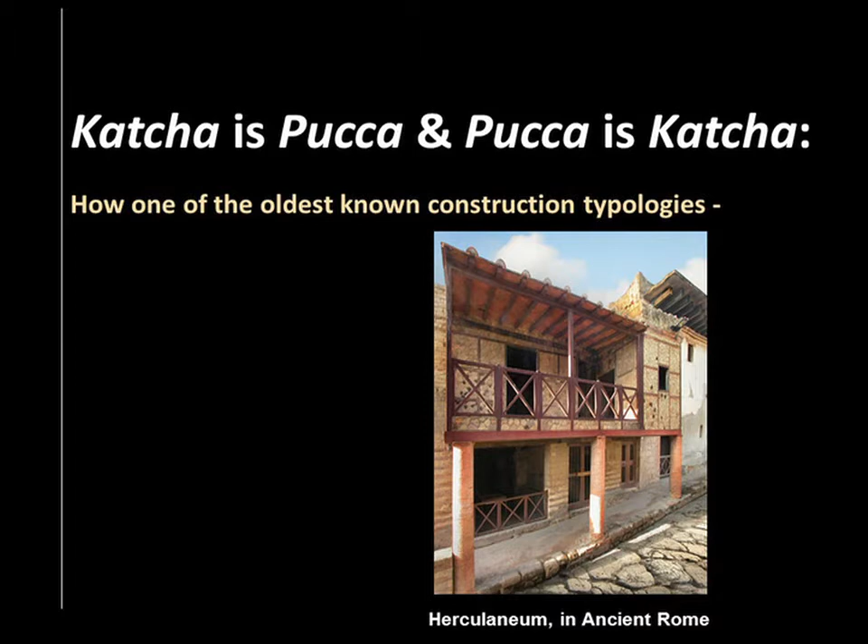There's lots to read about Randolph's bio, but I'll just say that his educational background is both in architecture and building conservation, with degrees from Harvard College and Harvard Graduate School of Design in the United States, and the Institute of Advanced Architectural Studies in York, England.

He's co-author of the book Amoskeag, published in 1978 by Random House and still in print, and also of Satanic Mills, published by Save Britain's Heritage. It was his early work on the great multi-story brick and stone factories, which were subjected to substantial vibrations from the power looms traditionally located on the upper floors of mill buildings in the United States, that launched his later life's work on earthquake-resistant forms of masonry and timber construction worldwide.

We've been seeing these pictures of collapsed buildings in Van, Turkey - pancake collapse. The modern buildings we've been dealing with - ironically, the reason I called the lecture Katcha is Pucca and Pucca is Katcha. For those of you not familiar with India, a Pukka house is a strong, permanent house, and it's become a synonym for a concrete house. A Kacha house is like one built out of bamboo, or now also timber, and masonry is not considered as strong as a Pukka house.

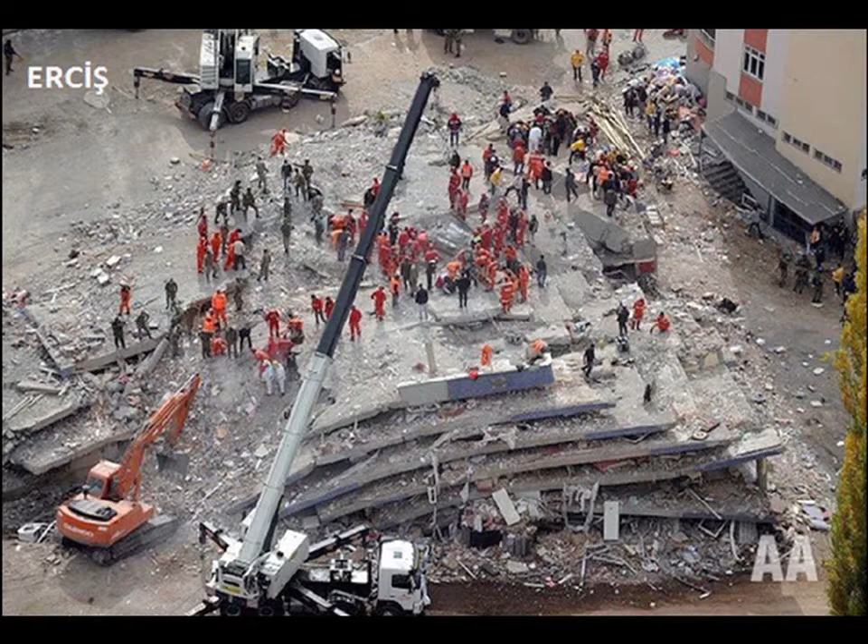And here we are seeing the Pukka buildings, so-called Pukka buildings, collapsing - not only just collapsing, but a pancake collapse, which seems to be invented by reinforced concrete slab and frame construction. Because then anybody who has survived is under layers and layers of armored concrete, and it takes, as we know, a challenge at best to get everybody out while they're still alive.

That earthquake in Van just recalls the one just 12 years ago - two of them in Turkey, further to the west - where just scads of reinforced concrete framed buildings had collapsed. And then just a few weeks earlier in Sikkim, same images.

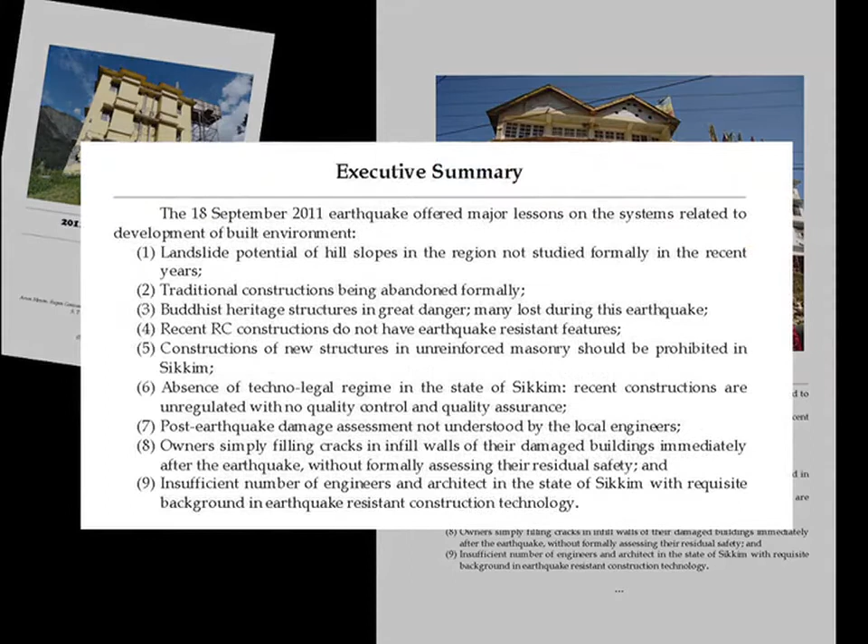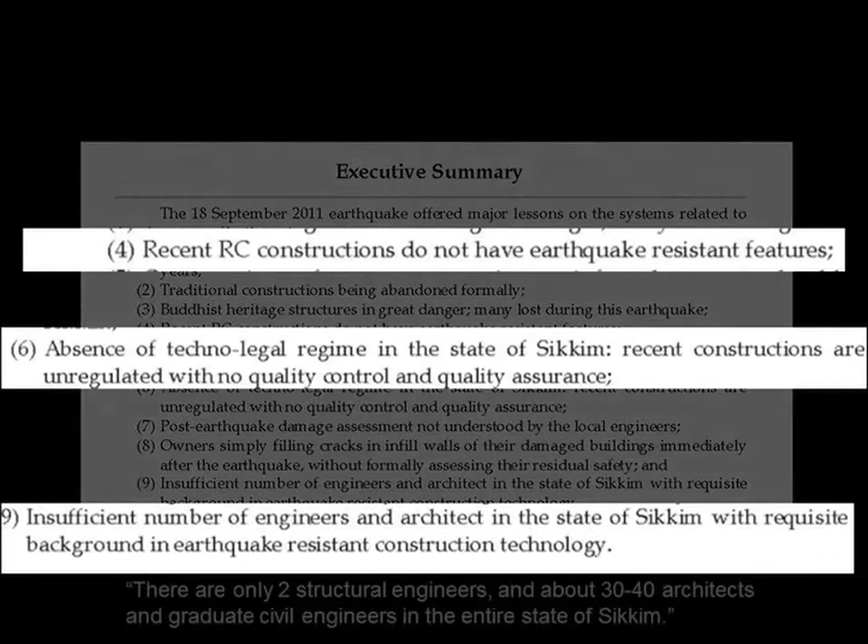It's interesting to look at a report that came out of the Sikkim earthquake and take a closer look at one of the things that were observed. Here you see the executive summary: the recent reinforced concrete constructions do not have earthquake-resistant features. That in some ways just understates the obvious - it's worse than that, as you'll see a little bit later.

But then when you see why, you have to ask yourself, well, if there are only two structural engineers in this part of the world, how can you even expect them to understand it? Well, then you say, well, aren't these and other types of buildings the same? I mean, that people would have at least a basic knowledge and put these buildings up.

What I've come to realize in doing this work is that reinforced concrete construction is a very sophisticated, knowledge-based form of construction, and the absence of the extra training needed to really understand this material has led to a crisis when it comes to earthquakes.

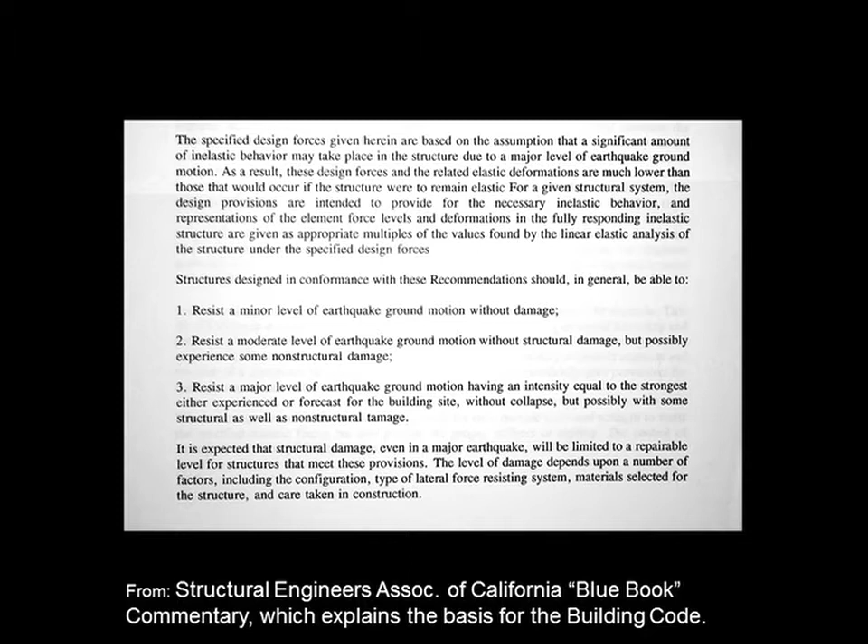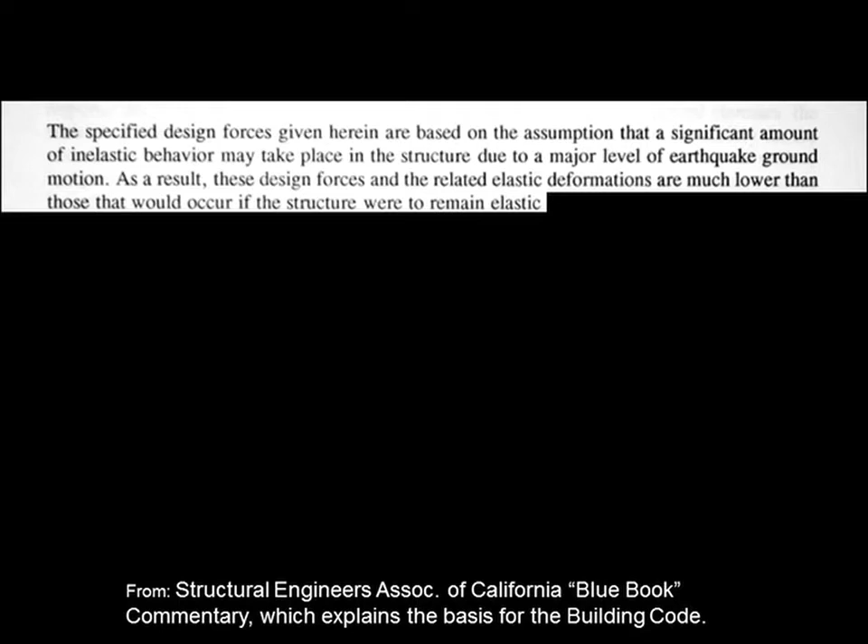Earthquakes are, in fact, unique. Most people will probably not realize that the building code in this country, in Europe, and anywhere there's a building code for construction, is predicated for earthquake risk on using lower force levels than are actually expected to occur in the design level earthquake. The reason is that it would be totally uneconomic to expect buildings to remain within the elastic range.

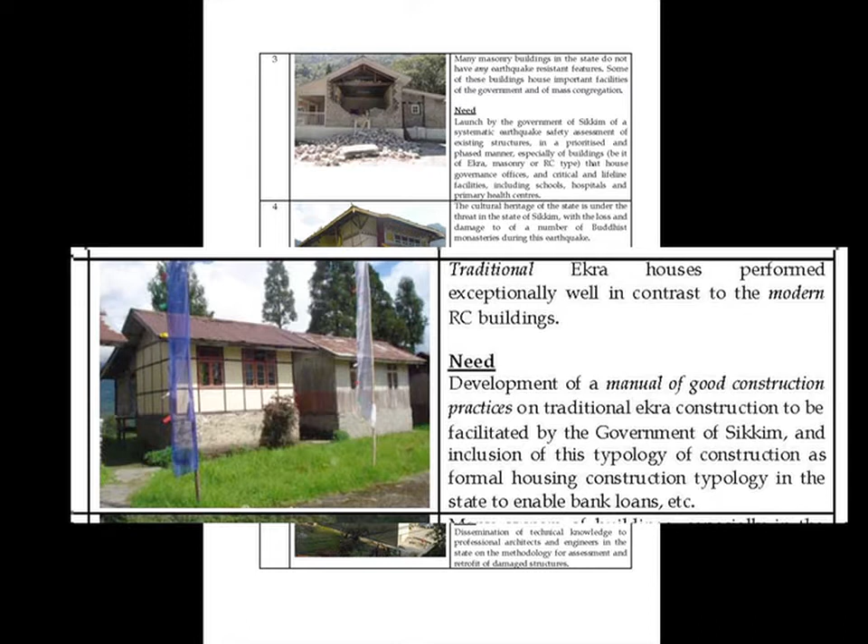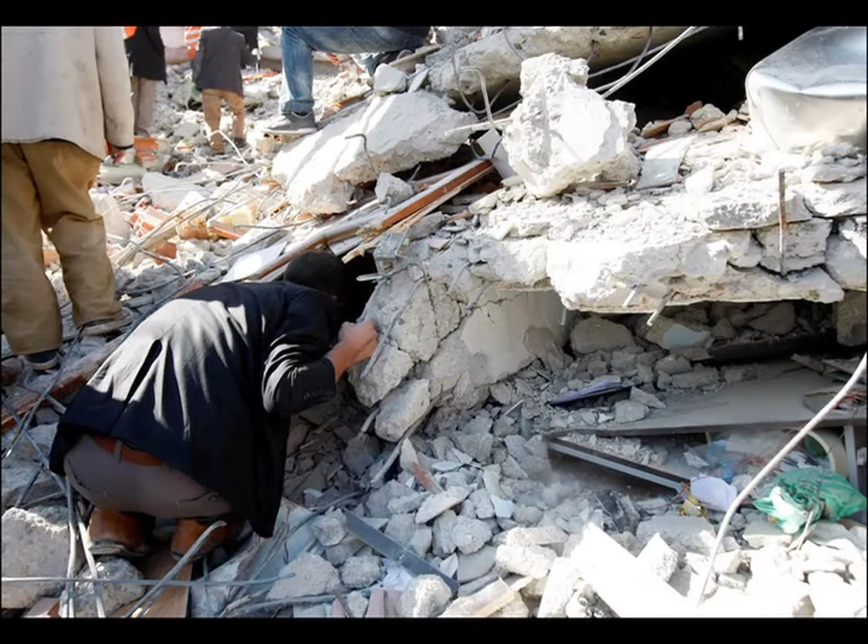Well, did people have training to build those houses? No, it's inherited, it's handed down, it's the same kind of thing. So look at the schools - we know that schools are a building type that has suffered in earthquakes out of scale with almost anything else. It's become the focus of the bank's attention, as well as almost every other agency and NGO involved in post-earthquake work. The schools in the older traditional form did better than the reinforced concrete, the Pukka houses.

This is the situation. What I'm saying, after having looked at this for the last 25 years or so, is I realized the essence of the exercise of looking at older buildings is: what can they teach us?

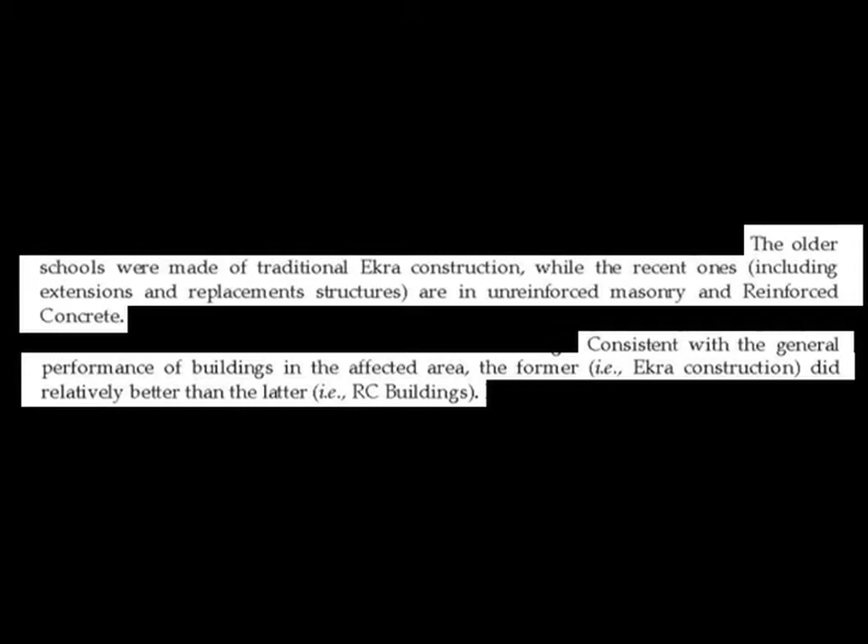And these buildings, in fact, are modern. That's why I called one of my websites Traditional is Modern, because it's time we see the continuum in building construction to really understand the nature of what we're dealing with.

This is Srinagar in Kashmir, the Indian part of Kashmir. These seemingly rickety, tumble-down buildings, as somebody in the 1880s reported in a travel document after the earthquake of 1888, said they seemed like the wind would blow them over, but they went through the earthquake better than the palace, which was just built in unreinforced masonry. And that building kind of says it all. How could something like that have any strength?

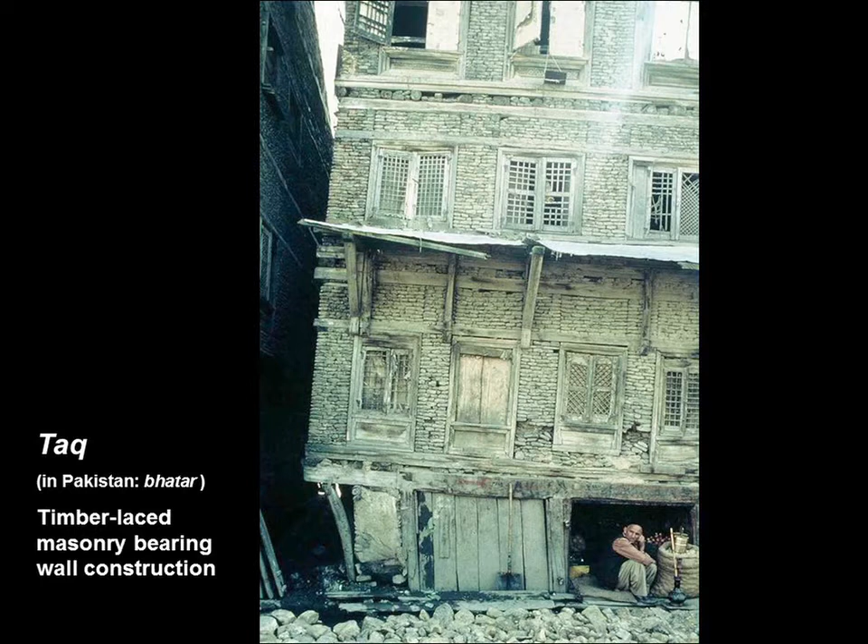Well, when you look at what the construction is and realize this was on a very soft soil site, this is not earthquake-resistant construction per se. It's not deliberately earthquake-resistant. It's a way of holding the buildings together from differential settlement on a soft soil site.

Not unlike Mexico City, Srinagar is on a prehistoric lake bed. And you can see, if you can hold a building up in three-point support on three points like that, that's masonry, bearing wall masonry. You're really talking about something held together by those strengths.

And when you look at how it is constructed, you can begin to see what's interesting about this is there's no vertical timbers. This is horizontal lacing only. I've come to realize that's really actually very important for this type of construction.

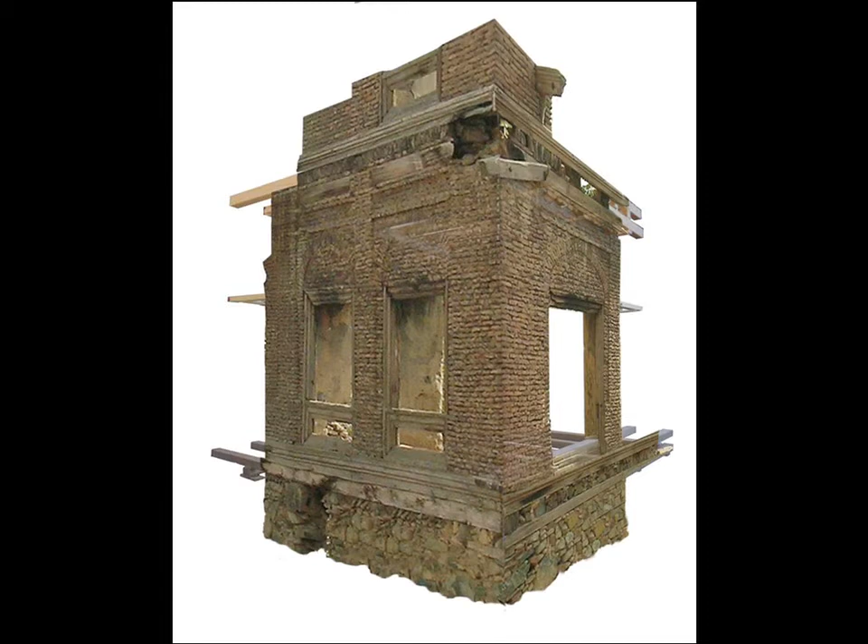Yet in the building code provision they developed for this in India, they stuck in a requirement for vertical rebar. And it's like, wait a minute. In my book here, I said that's the one mistake. I took the liberty to criticize the foremost engineer in all of India, Anand Arya, who wrote that code.

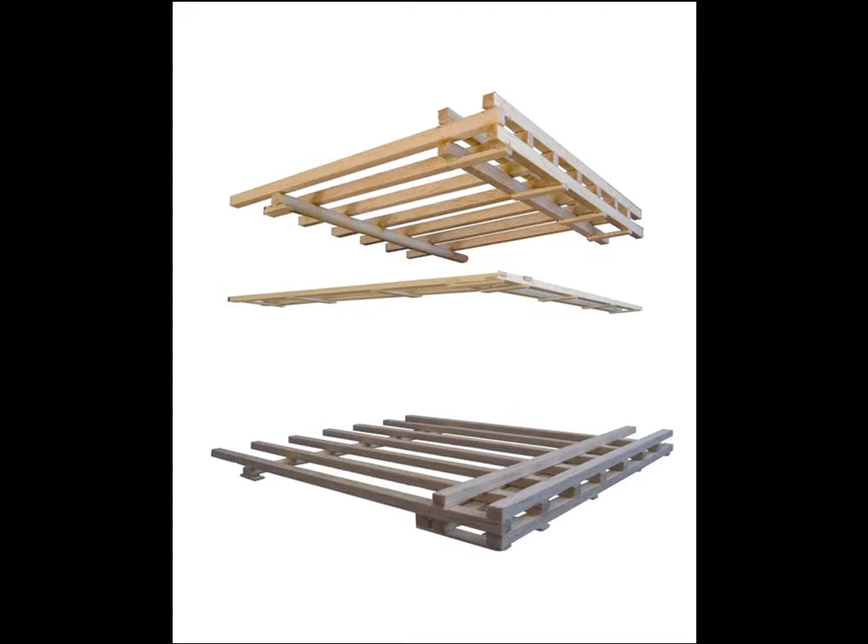Because I think their failure to understand that this is a bearing system, and that it has to move over time and maintain that overburden weight, is a characteristic mistake that engineers today often miss about how masonry works.

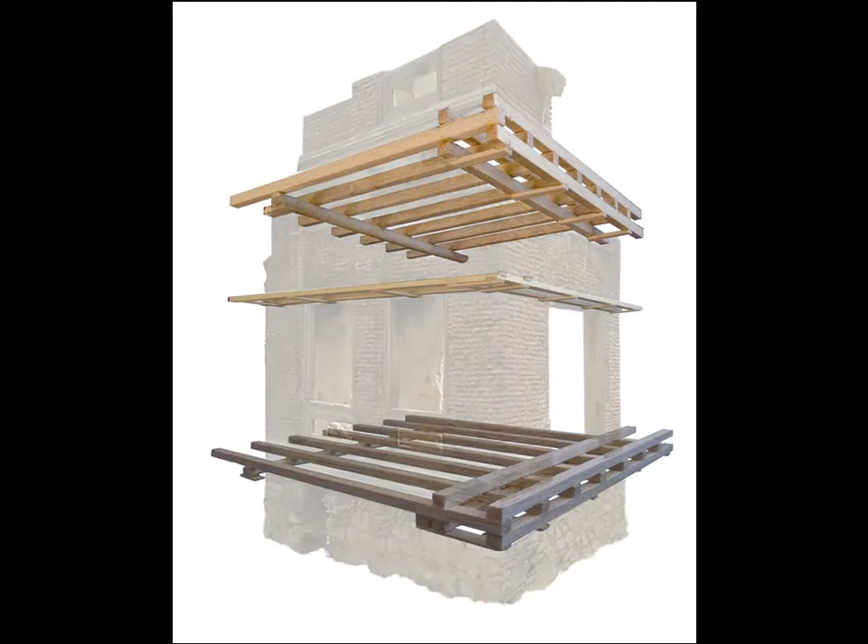So there you see where those frames are. They're at the floor level, gripping on inside and outside the wall, with a joist that runs all the way through the wall to the outside, and then a cross side is picked up by subordinate joists, cross pieces of wood, and then above the window head and at the next floor level.

These buildings are not small. So you can see on the exterior how they're laced together, which is kind of nice to actually see. One of the problems with reinforced concrete and other forms of construction, even retrofitted buildings, is you embed the rebar in the wall and you won't see it. You can't know whether it's there, has it rusted away like it did in Haiti, and so on. Here's what happens to buildings there if they don't have timber lace.

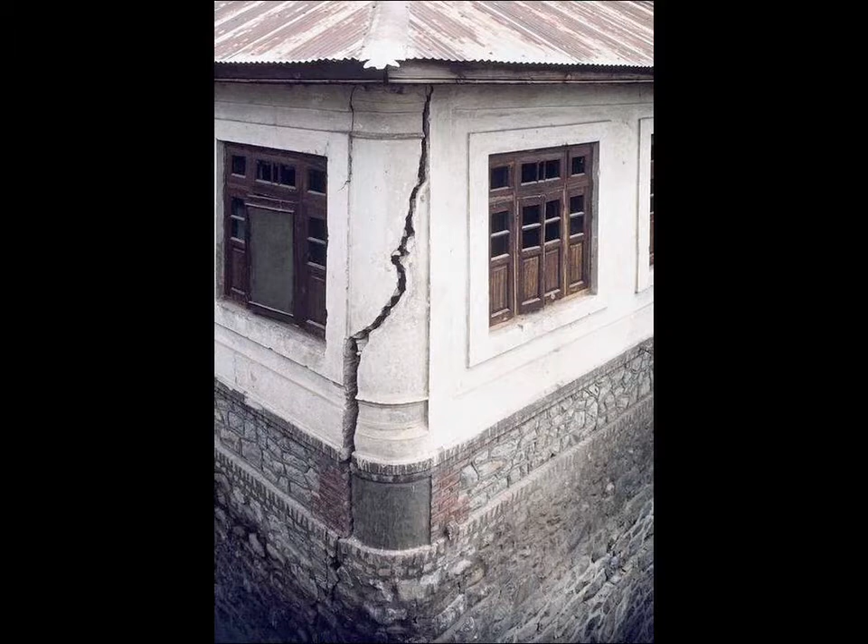Well, this form of construction, the best word I found for it was taq for Srinagar, or bhatar on the Pakistan side of the border, is embodied in the Indian Building Code.

Now the other type, which is going to carry through the rest of my talk, is the dhajji dewari. That is an interesting form of construction because it is almost universal. It's a frame-based, complete timber frame.

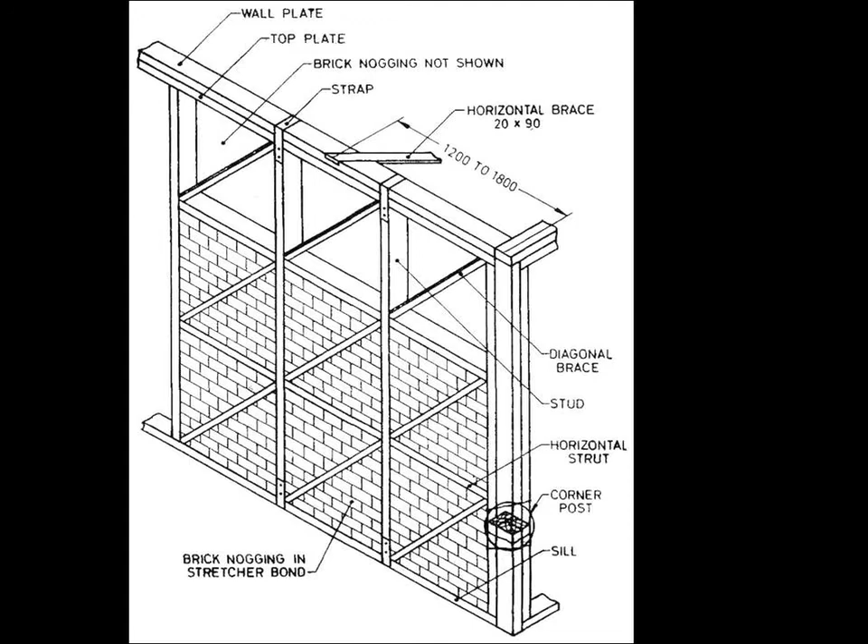What's interesting is that in two places in the world I've been able to find it where it was invented, developed, and mandated as earthquake-resistant construction. First was in Portugal after the great 1755 All Saints' Day earthquake in Lisbon, where it became named the Gaiola and was required by law for the reconstructed area of downtown Lisbon.

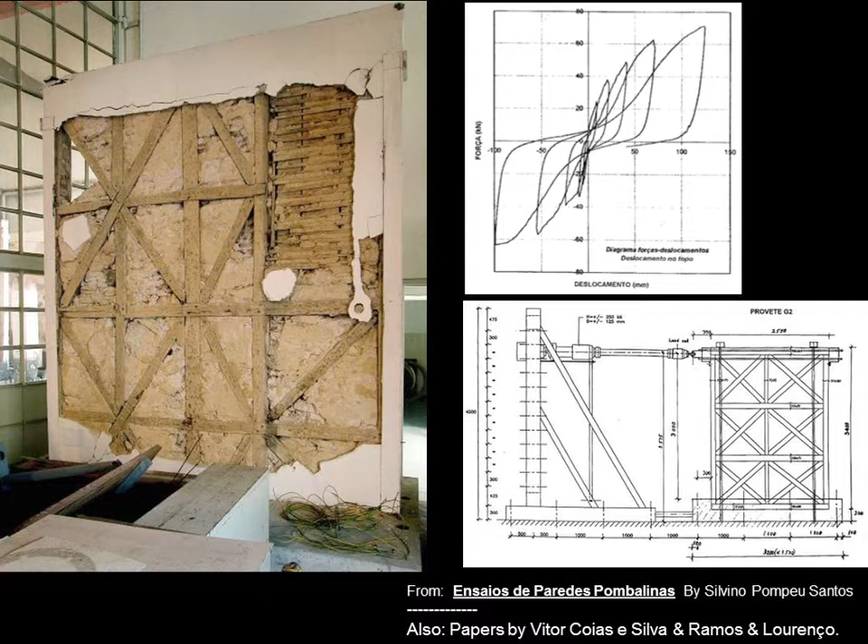And there's a picture of a building where the plaster had been removed from the wall, showing this timber frame with infill. This research that the Portuguese government did shows incredibly good seismic behavior, where the amount of energy dissipation these walls can provide is shown in this graphic. The thrust of the machine never took it to a declining strength.

Moving on to contemporary earthquakes, there is the Kashmir earthquake of 2005, centered on the Pakistan side of the border, but it did cause damage in India. The 80,000 or so deaths were almost all within Pakistan.

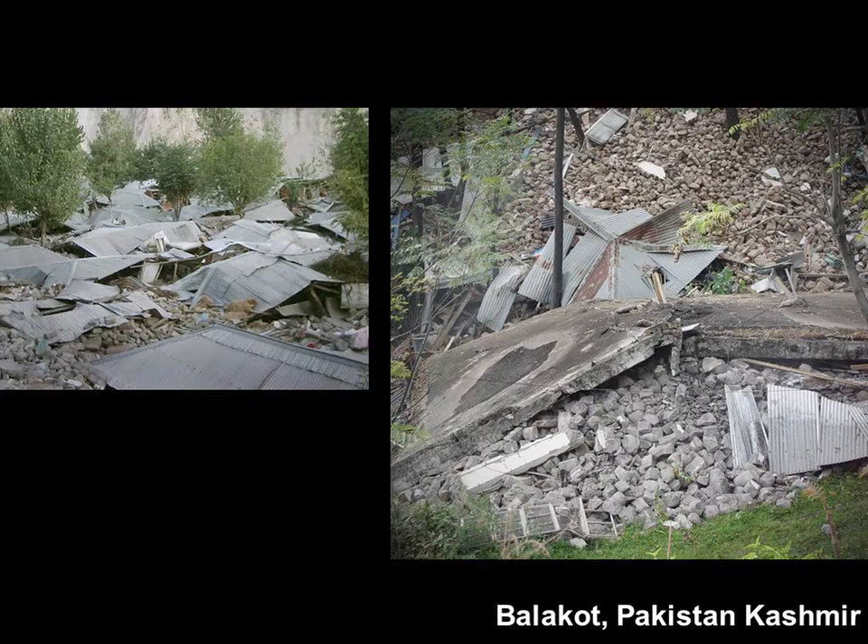In the damaged district itself, the town of Balakot was basically leveled. The only identifiable shapes left were the tin roofs. This was unreinforced masonry block construction where the blocks, if you look carefully, look almost cubic rather than rectangular, making for a very poor kind of masonry. And then the floors were concrete, so they're heavy buildings.

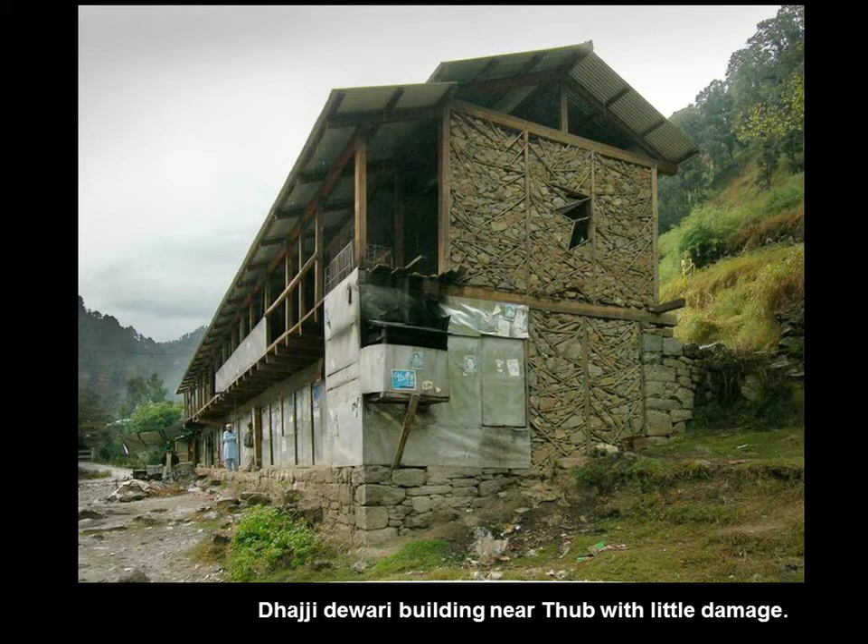I did get into the rural countryside, and that became very interesting - here is essentially their store in the center of a little village called Thub. That collapsed; it was 3 stories to begin with. But right nearby were 2 buildings that were Dhajji construction. Dhajji Dewari means patchwork wall, and they came through just fine.

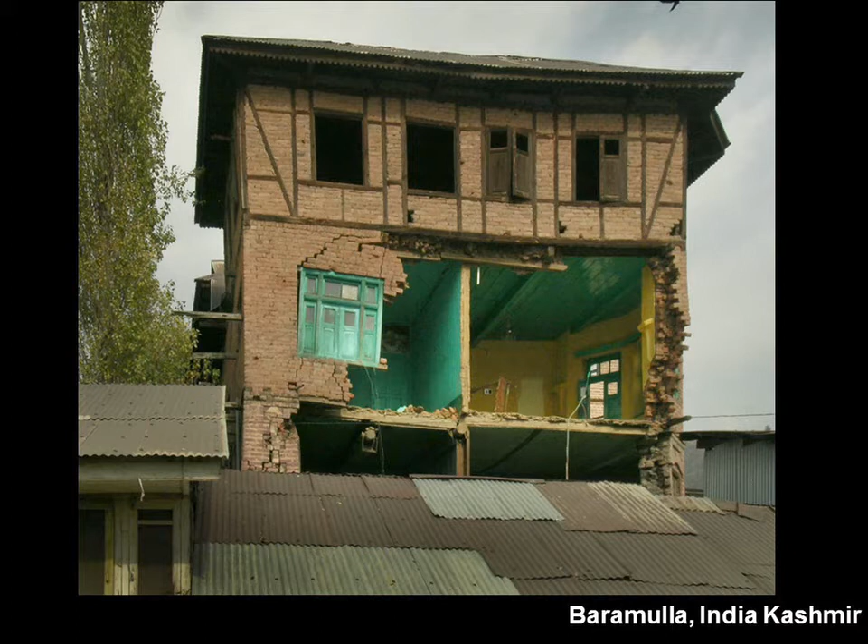And across the border on the India side was this one. It shows you how the Dhajji construction can even form a truss across an opening where the unreinforced masonry below it failed. But looking back into the Pakistan side, in the heart of the earthquake area, the same little town - it was very interesting to see that most of the population who lost houses lived in rubble stone houses.

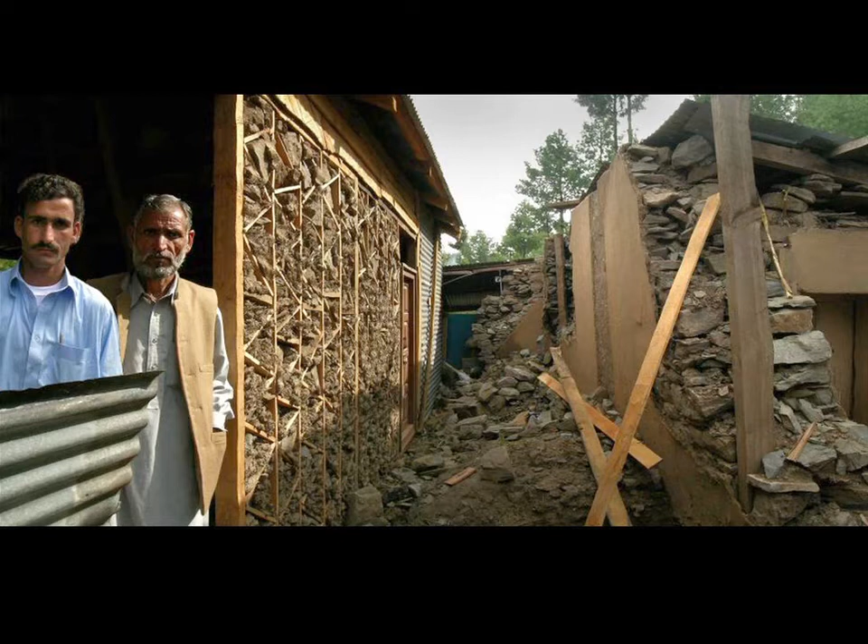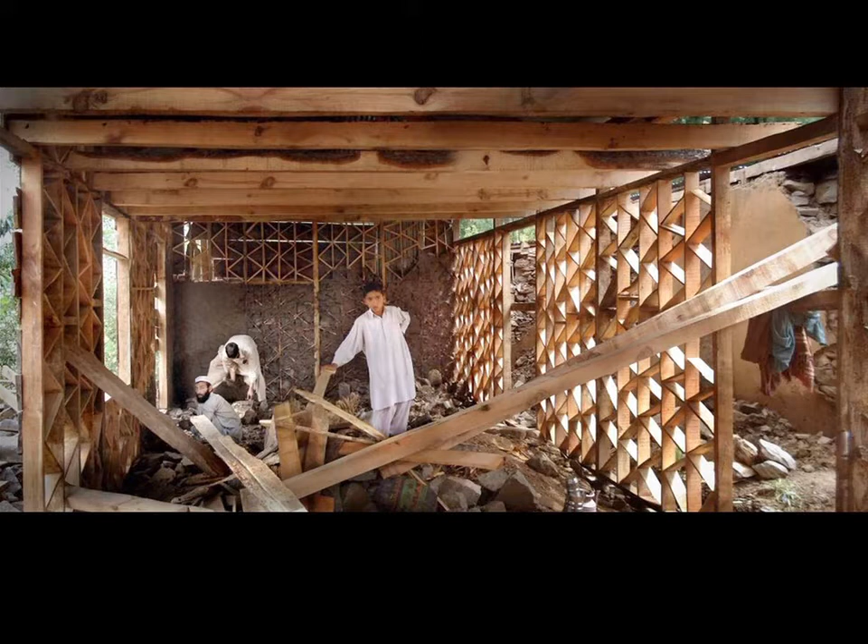The government of Pakistan said you would get no financial assistance for earthquake damage if you didn't build an earthquake-compliant house, which had to be reinforced concrete or concrete block construction. Well, in the rural countryside, that would mean hauling steel and concrete, rebar, concrete block in on mules and horses and maybe some vehicles in order to do that.

These people went ahead and did it themselves. In spite of that, a year after the earthquake, my colleagues persuaded the government to accept Dhajji construction as compliant. I felt particularly moved by that because I discovered they used my language from an article written 20 years earlier in the government document that approved it.

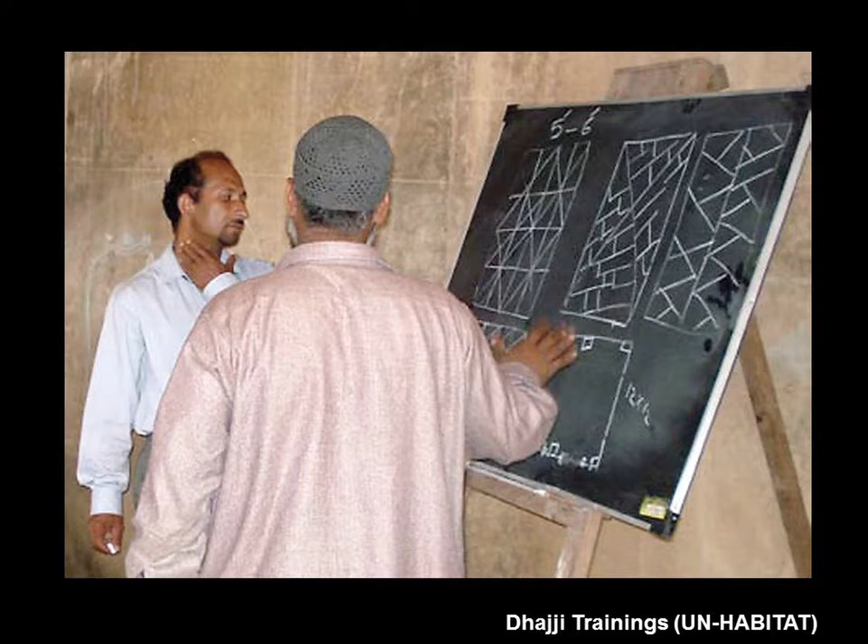And then they were doing lessons on how to do it well in the training areas of the NGOs. The Swiss Agency for Development Cooperation teamed up with UN Habitat, and this is just some pictures of those trainings.

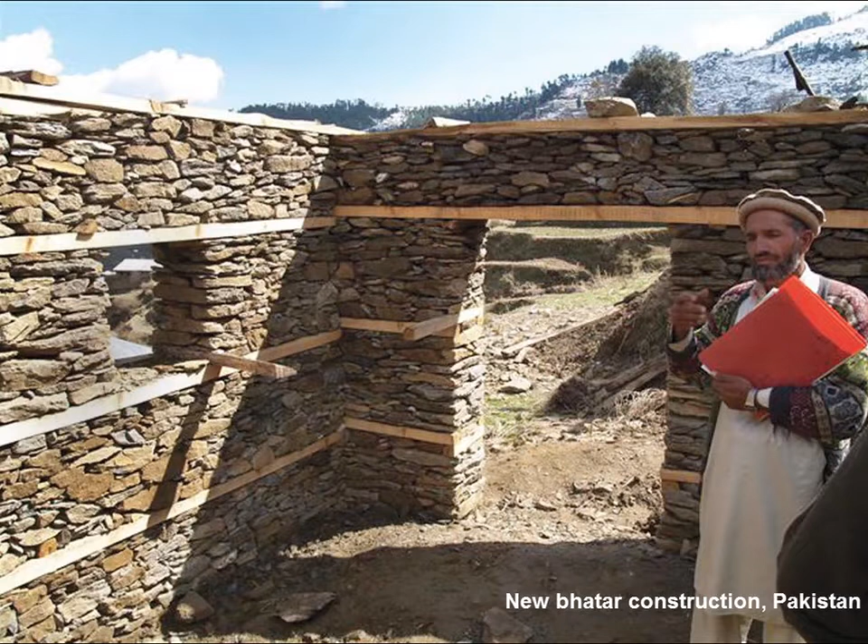And now I'm told by my colleague, who's now in Haiti, that there's over 250,000 new houses having been constructed in Dhajji construction throughout this district in Pakistan. And there are a smaller number, an unknown number of them in Bhatar construction, which was approved about a year later.

The bearing wall masonry construction with only horizontal timber lacing is also approved. So that's a rather good side point there, because in fact, one of the World Bank representatives opposed this, from what I've been told. I even learned that they had a meeting somewhere outside of the country, and they approved this while the guy who was opposing it was out of the country.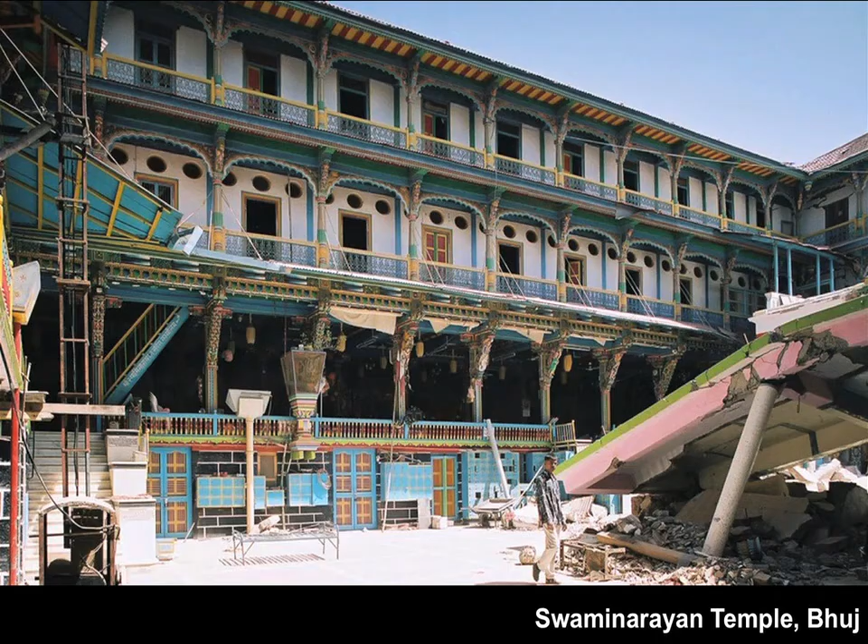There it is, after the earthquake. And the concrete building in the yard there, you see on the right, completely down. If anybody can say that's not a soft story condition, I don't know what is. And there it is, as clean as a whistle. All of those walls above and below are masonry, timber framed masonry - the dhajji style of construction.

So there you see that pattern, and you take it back and it gives it a nice - it's like a shaking table test on it.

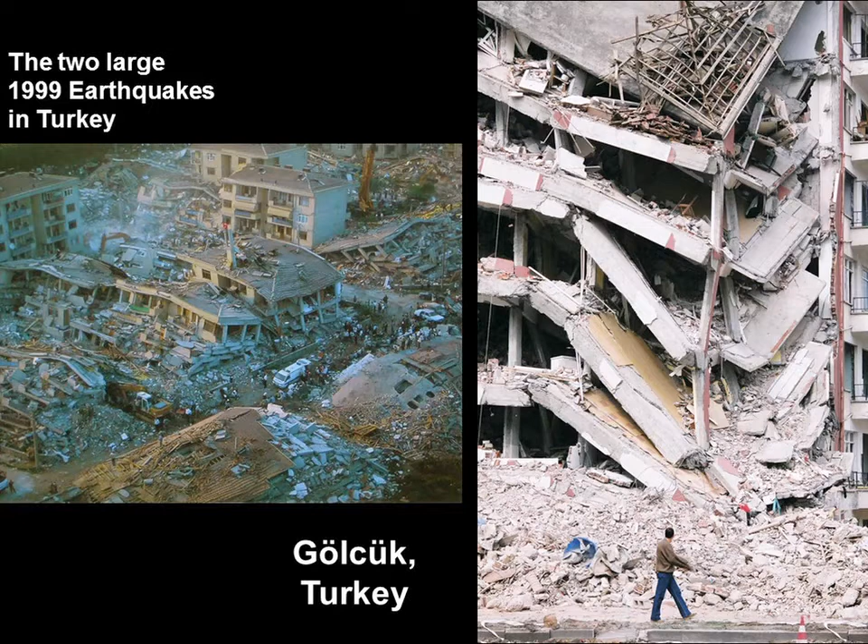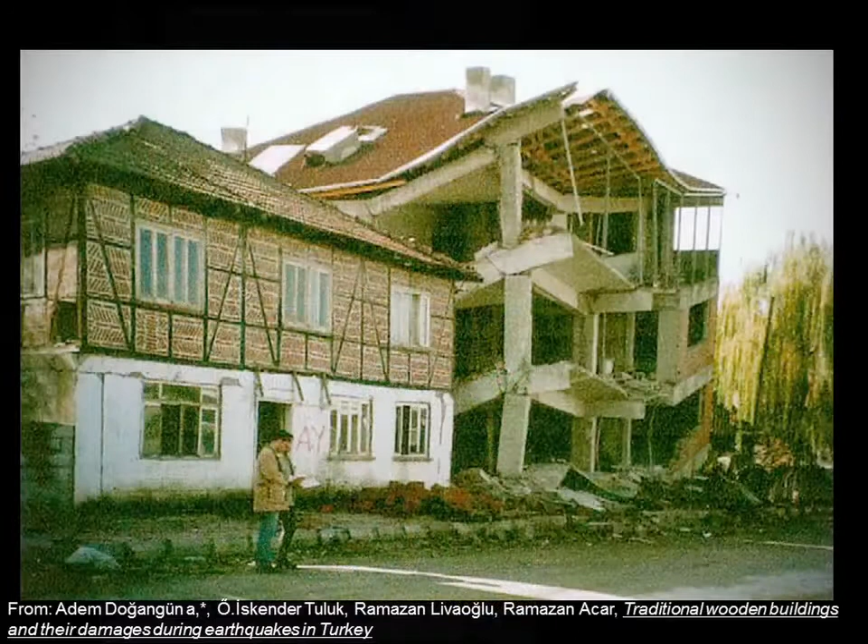Here's an example where the concrete building is not one of these big high rises, so therefore it's not very big, and right next to it is the timber-lace building, and you see how they did. And don't just take the selection of pictures to be an answer. Here is a study that Turkish scholars did where they actually lumped together all traditional structures, including unreinforced masonry, and you see how much better they did across the entire damage district. That was the level of difference.

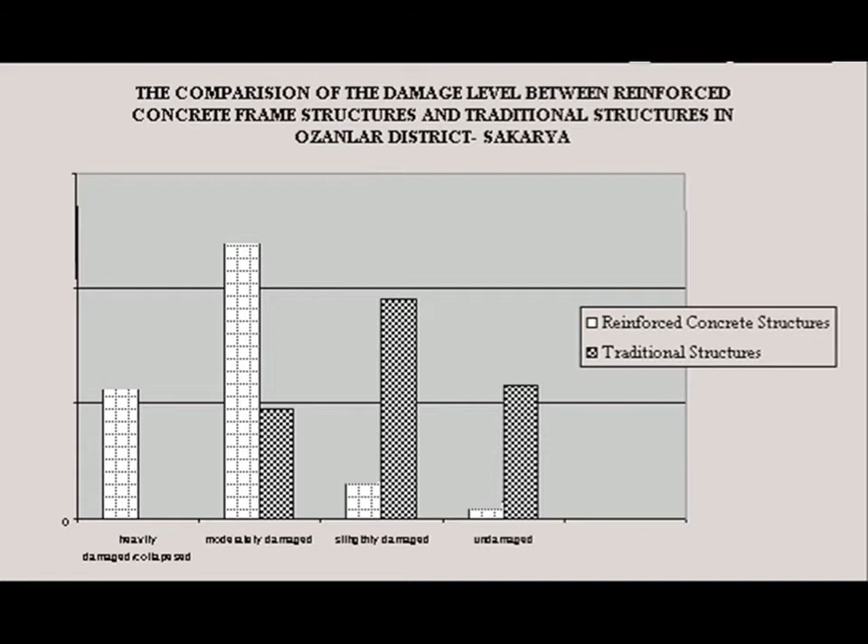So we're dealing with something here where the answer may lie in this form of construction. I have to bring Haiti into it because there is where it moves off the charts, because we have the downtown of Haiti as an example where the reports of the death toll and the amount of damage is extraordinary.

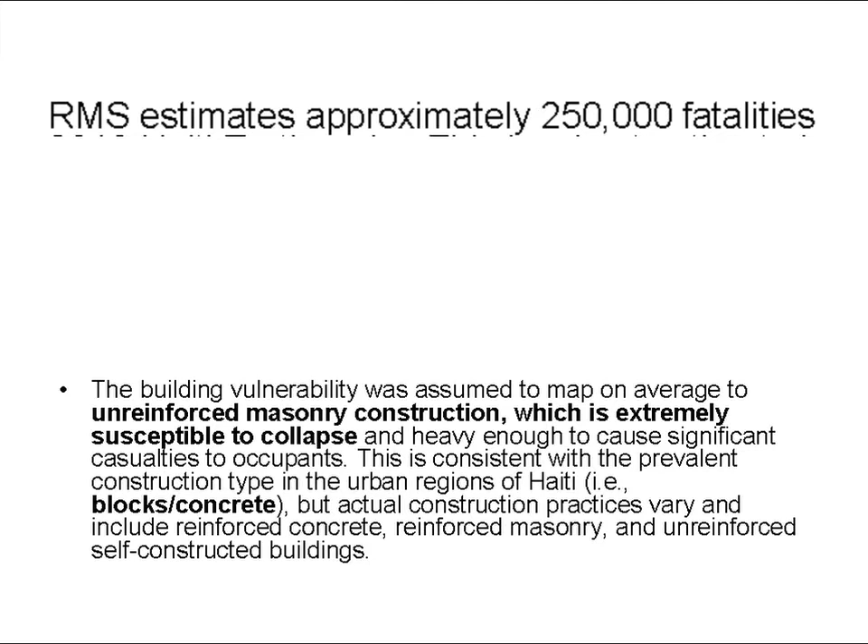Looking at a publication published 4 days after the earthquake by a forensics engineering firm, RMS, Risk Management Solutions, they estimated 250,000 fatalities in this earthquake. I called them and said, what was this based on? And you could see in the report what they did base it on. And as you know, the death toll has stayed hovering around there in almost all subsequent publications.

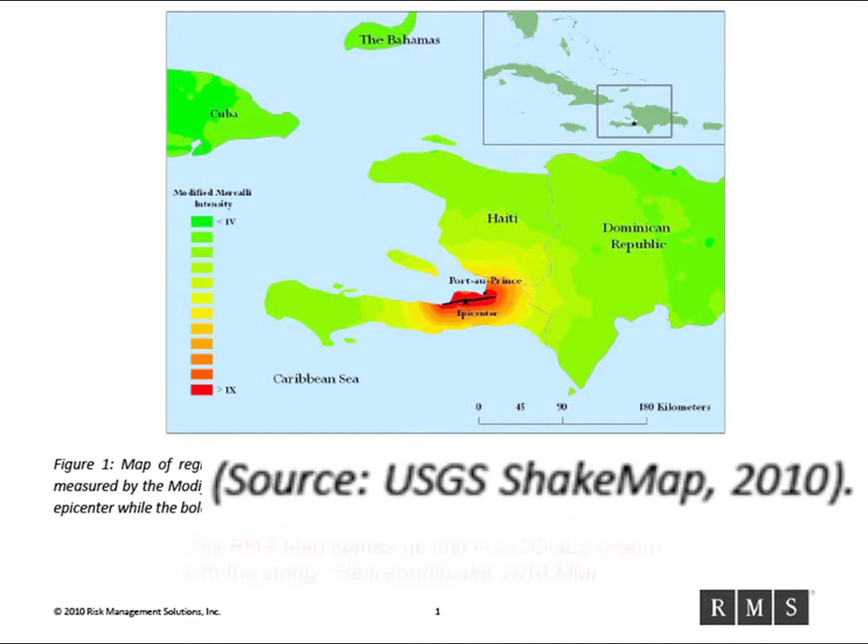But in their report, it was based upon USGS ShakeMap. They don't say which USGS shake map, as if all shake maps are the same. So I went looking for a shake map, and I found one on Wikipedia that shows a fault trace that goes right under Port-au-Prince. This is Port-au-Prince here, central Port-au-Prince.

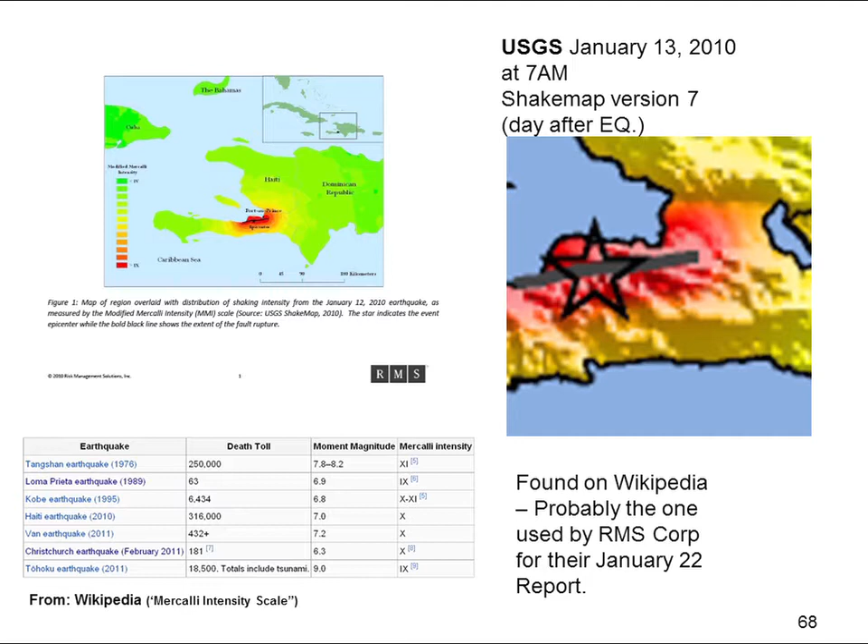You see this is supposedly the line of the break. This is shake map version 7. USGS would not give me a copy; I called them, and they only will give you a copy of their latest version. Well, look at the January 12th version, the day earlier - the fault trace is more out to sea. That's why they thought there would be a tsunami effect, and there wasn't, and it doesn't get to Port-au-Prince. And the current one, since March 4th, also doesn't get to Port-au-Prince. So this is a paler color, meaning under their USGS shake maps, the shaking was less in Port-au-Prince.

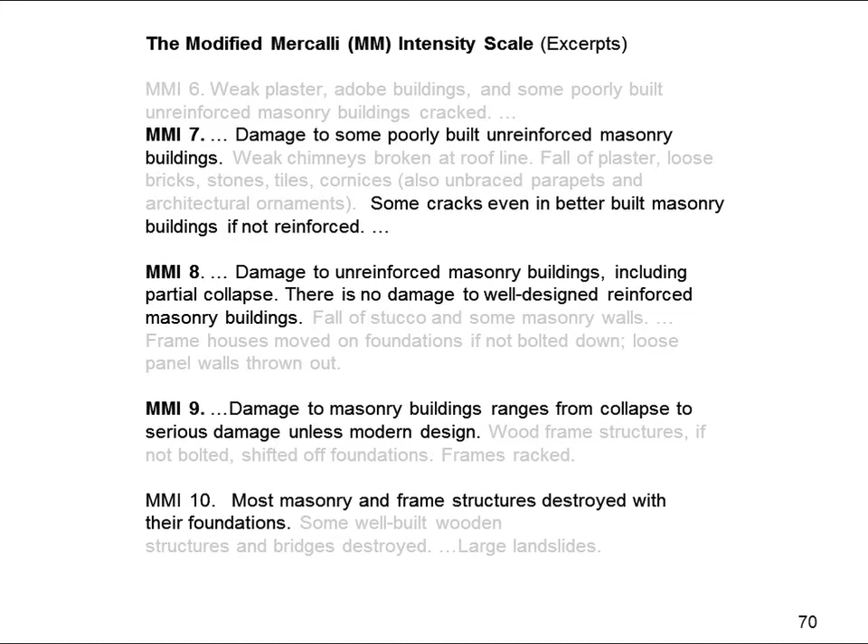Now, the modified Mercalli scale is a qualitative scale based upon building damage to try to estimate how much ground shaking there was based upon buildings. Based on what you'll see in a moment, I've come up with the estimate that this is actually an MMI 7, whereas if you go on the internet, you'll see it as high as a 10, which you see right there - it's still published today. And the USGS has it as a 7.

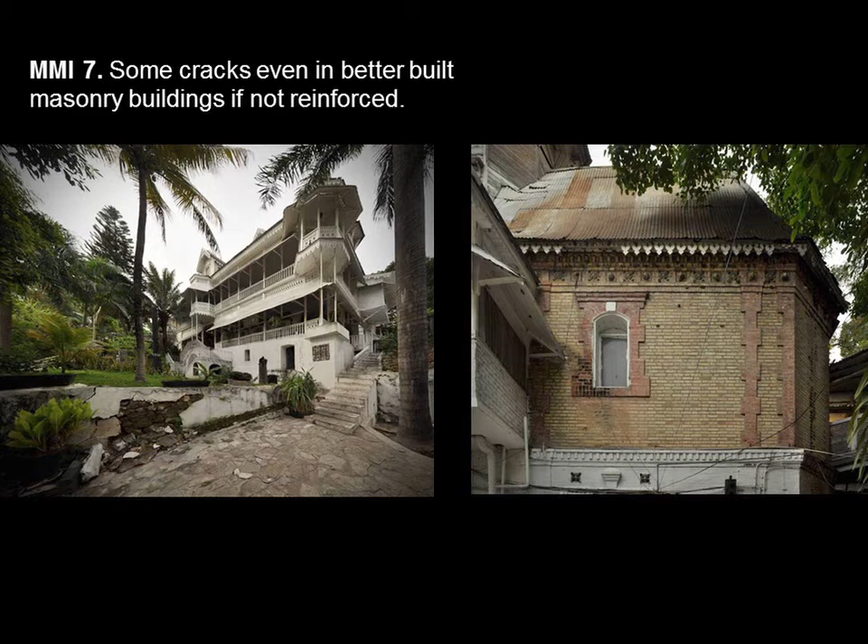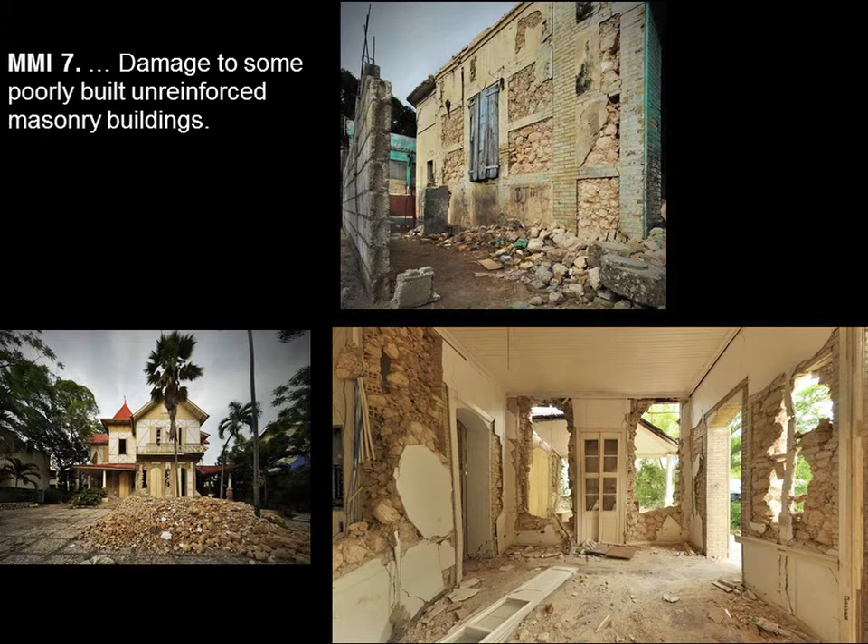Another form of construction, the more usual form of historic construction, is this, which is an infill rubble stone masonry. So it'd be hard to classify rubble stone masonry, even though it's surrounded here by brick, as good quality masonry construction when it comes to earthquakes, for many reasons I can explain. And as you see, the rubble stone fell out, but the building remained standing. So this would classify as a poor masonry building under the Mercalli scale. Again, these buildings were extant when Giuseppe Mercalli was alive.

And then I want to honor our guest, Anushka Mecklenburg, who is the owner of this house, which is on the cover of the World Monuments Fund book. This house is a combination - it's actually well crafted, good quality brick masonry, but behind that masonry is rubble stone, so it falls in between. That's the level of damage that it had. It did not collapse, and we're now trying to help her and help Haiti save this building, which has become an icon of the earthquake by being on the book.

There is another type, which is like the dhajji dewari of Kashmir, or the himis construction of Turkey - here in Haiti, in French, called colombage, infill masonry. This building had just tiny bits of damage on it, and it is right behind the National Palace. That pancake collapsed. And nearly across the street from here, a rather small concrete building also collapsed.

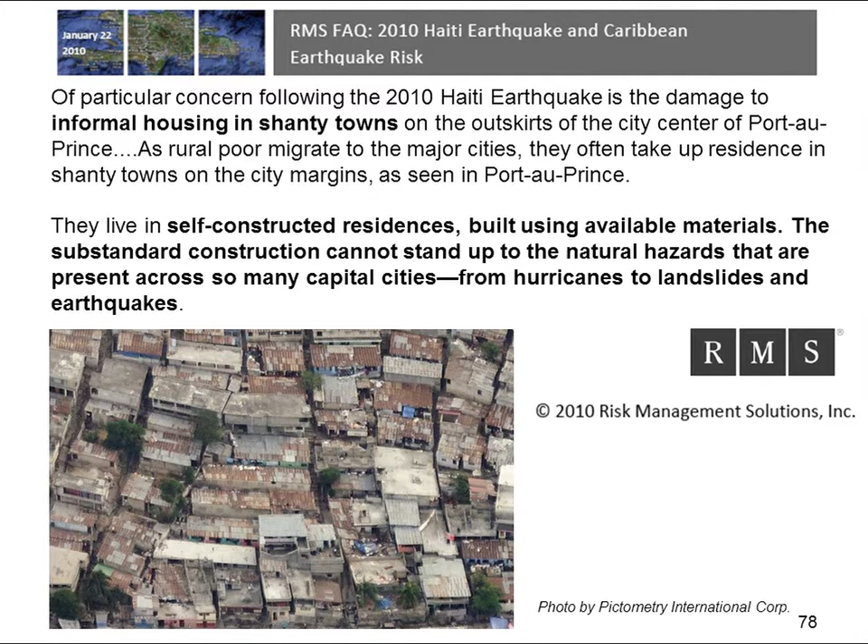But what about what I found in the pictometry analysis? Areas and areas upon areas where you're hard-pressed to find damage. And in the newspaper shots, it's not as if there was no damage, but it just simply wasn't the concentration of damage one would expect to find. So this becomes really interesting.

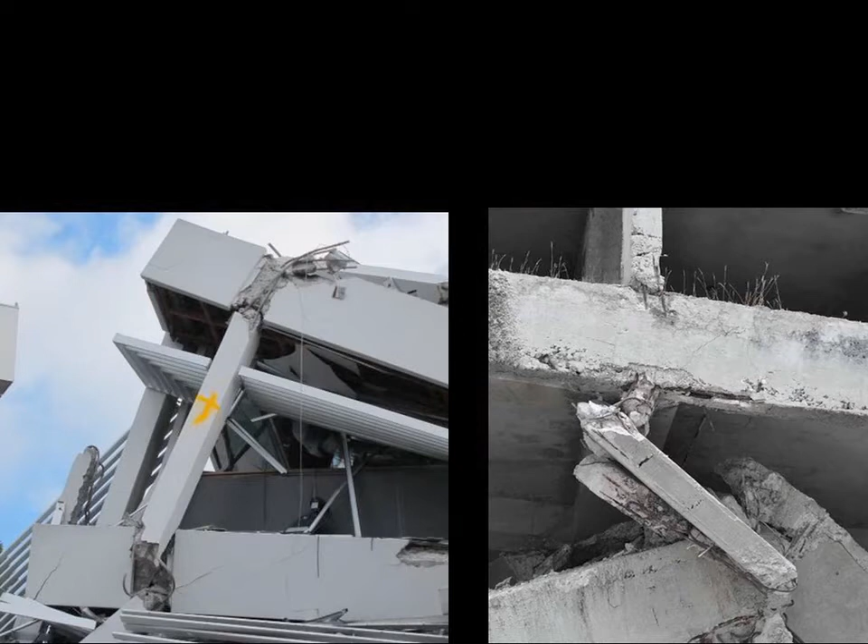And here is an interesting juxtaposition. On the right, you have Haiti, with thousands of pages of words about how this poor country could not have had a sophisticated building industry. But what about New Zealand, which has one of the most advanced seismic engineering communities in the world, from which we get many of our professors in our schools? That's Christchurch, New Zealand, and after the earthquake it ended up pancaked.

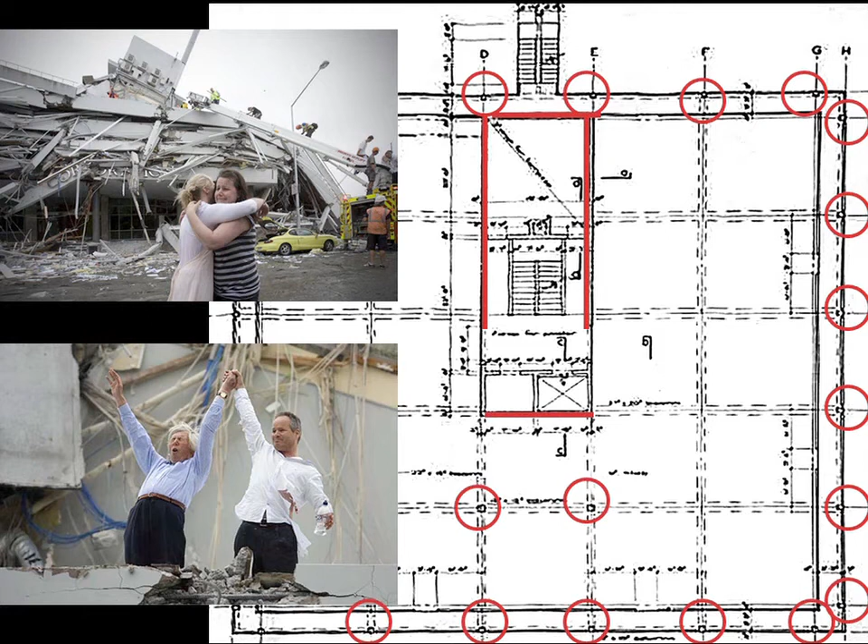And then when I saw this, somebody sent me a floor plan — those are the columns of the building, all the way to a central core, and the central core didn't fall down. All the floors were resting on those columns. They were not encased or engaged. They had no shear caps or anything. Those little gossamer columns you saw in that picture are all that held up the building.

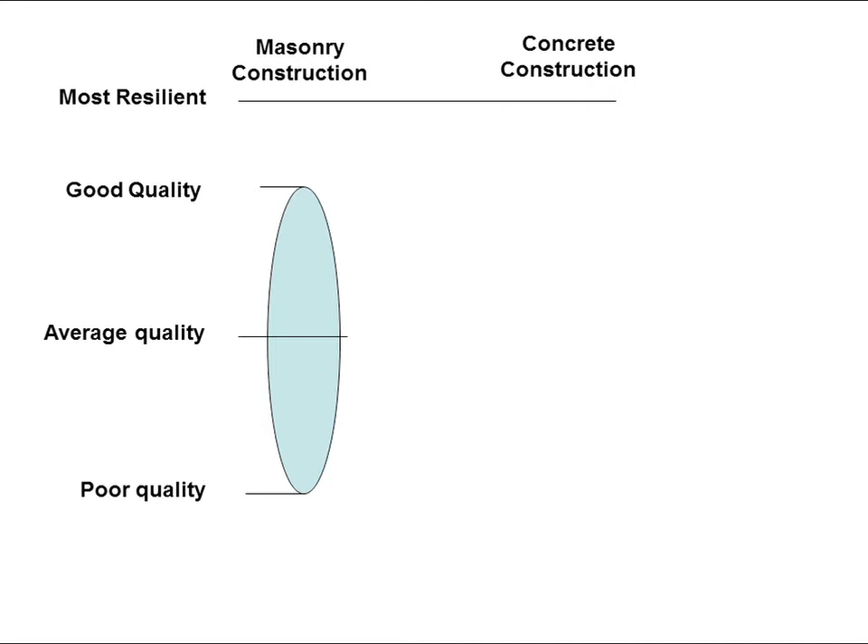So here we have a situation where I want to be clear — we're not talking about every building, but concrete construction has brought a new low as well as a new high to quality standards. At the low end, it falls below poor quality masonry when we see these kinds of failures. It has little reserve, it doesn't have any damping in it, so it goes to collapse almost immediately.

And we're only talking about poor quality here, so we have collapse at an MMI 7. And then in a place like Haiti, it really is a pyramid in terms of numbers. If we look at this, we can place these buildings on this plan where you have poor quality and good quality masonry, and at the same time place the concrete buildings on that.

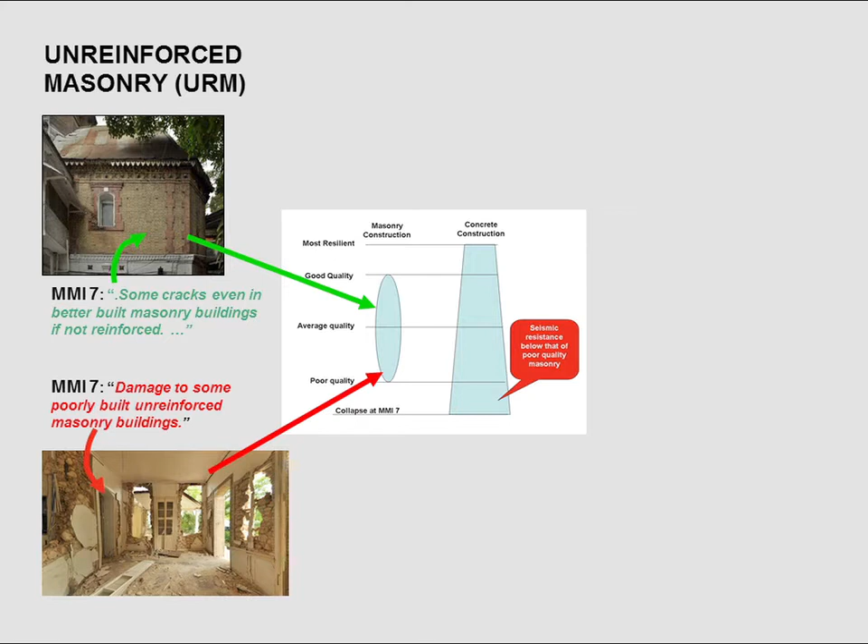So on the good end of concrete, we have some examples. We have a building that was rolled, God knows how far from its original foundation by the tsunami, and nobody could say that building was poor construction if it was actually rolled by the wave of the tsunami and ends up resting on its side with the structure intact.

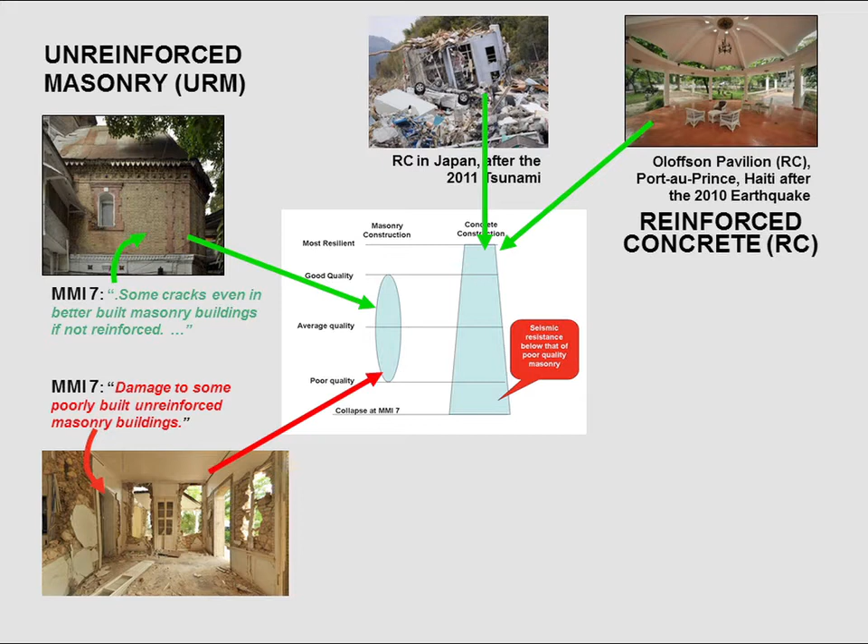Or in Haiti, that pavilion. That's reinforced concrete with a heavy roof and only one shear wall in the whole thing, behind the bar, which was behind me as the photographer. And then you have the other extreme.

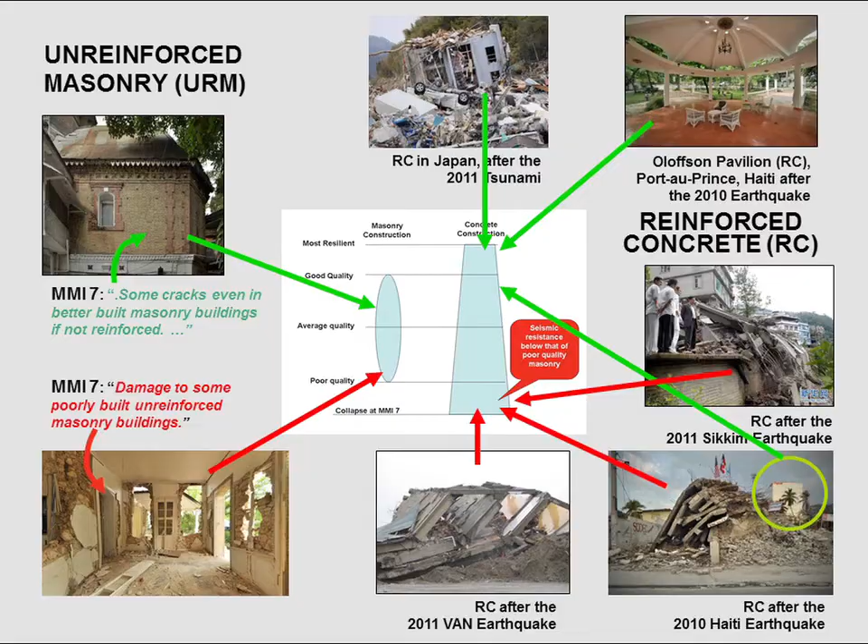In Van, in Sikkim, and Haiti, just these three examples. But then on the right there, you see the Digicel building, which falls somewhere in between. It's still standing, it had damage, and it was considered good quality construction. But when I asked an engineer, a colleague of mine, what did he find that were the problems with concrete? This is the list he gave me.

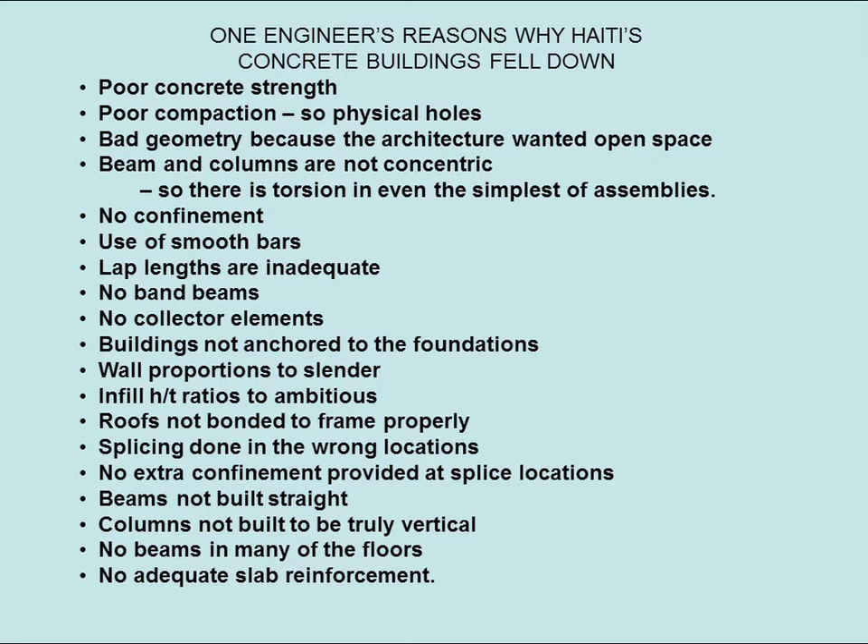But I want to tell you something different. I could go on and on about poor quality construction. I think that's a mistake, that we're really dealing with something where there's a fatal flaw to the system from the very invention of the method of analysis under which it was created.

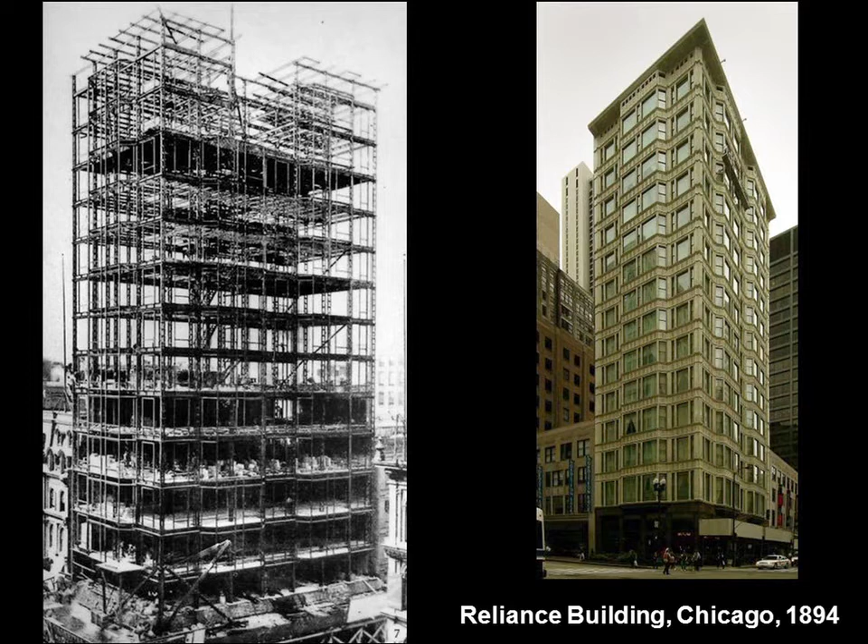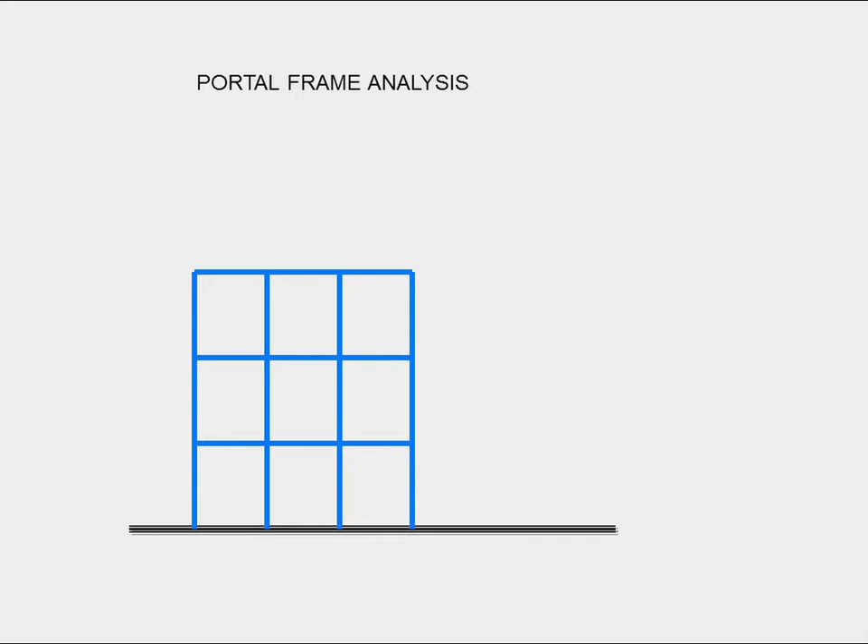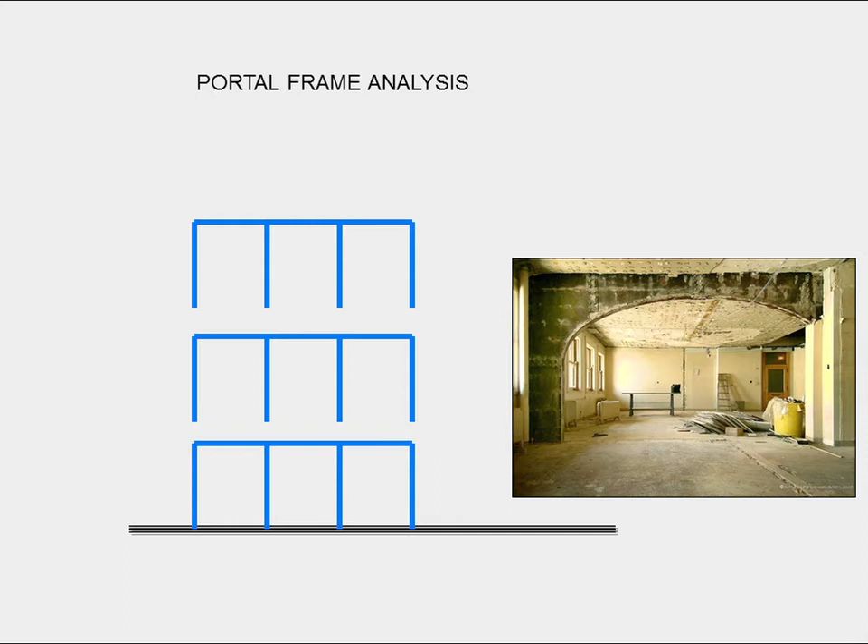And here is what I want to take you back to. The invention of the skyscraper in Chicago and the invention of the engineering system was a change from simply analyzing each floor, one floor above the other, which then only really works in an analysis if you have an immensely rigid system with a pin connection at the floor level. Well, the invention was improved by coming up with the portal frame analysis based upon contraflexure methodology, where each of these segmentizing of the structure can be analyzed by the three equations of equilibrium, allowing you to build a multi-story building and keep going and have known, not indeterminate forces on each of these pieces.

Well, this is a very creative and a very important change that has been maintained in existence all the way through time to the present as a way of designing buildings. And there's nothing wrong inherently in the system except for one thing. Here is how it deflects.

Well, in anything other than earthquakes, the whole building is expected to remain within the elastic range of its materials. So the infill walls, the masonry walls, which are not part of the engineering design except by dead weight, are not so much a problem then. But in earthquakes, remember, the thing is expected to yield, and that kind of S shape to the beams is really an inherent part of its behavior.

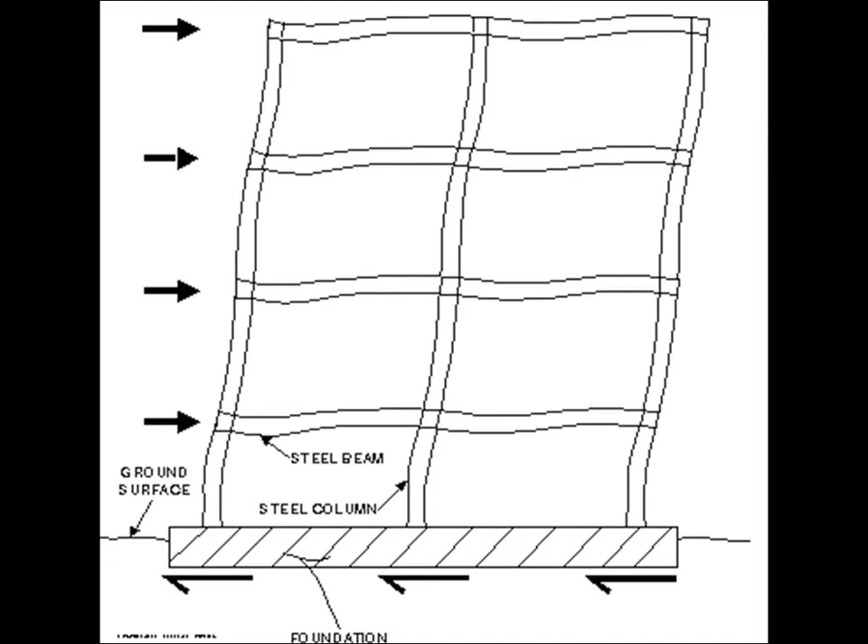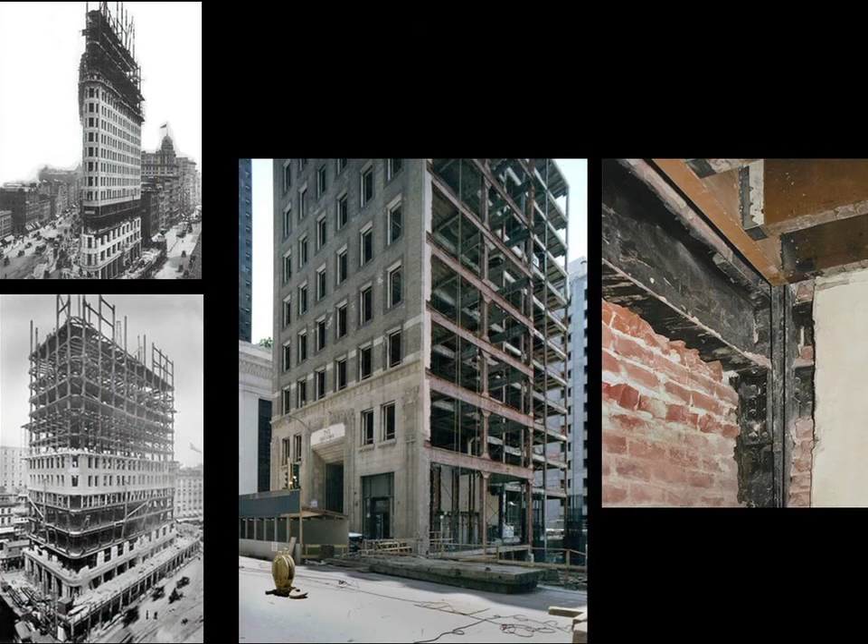These tall buildings are a product of that, all the way to the Empire State Building, but they are clad in masonry. The masonry is an inherent part of the first phase of the development of the American skyscraper and of buildings designed with the portal frame analysis. And you see the masonry wall is being built on the Flatiron Building at two places at the same time, so as to avoid creating a bearing wall.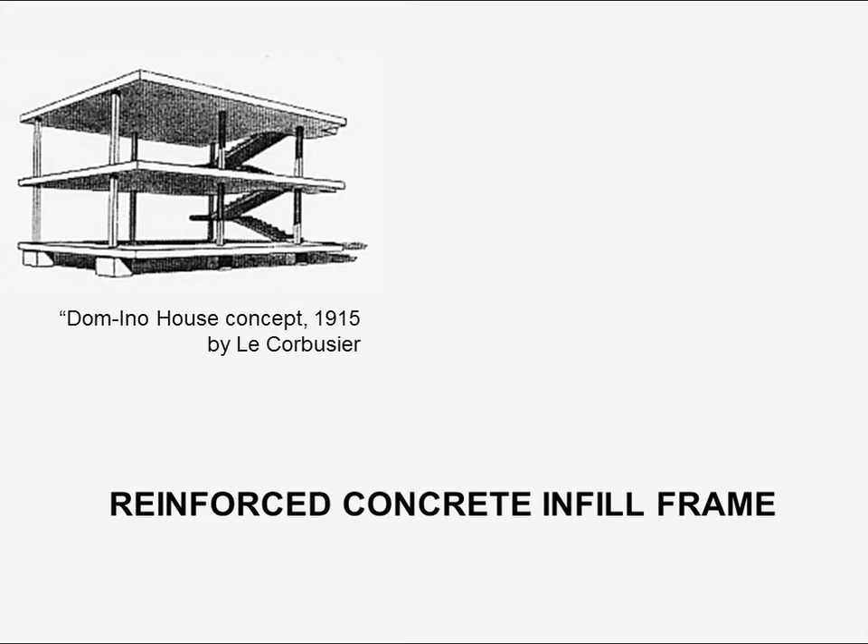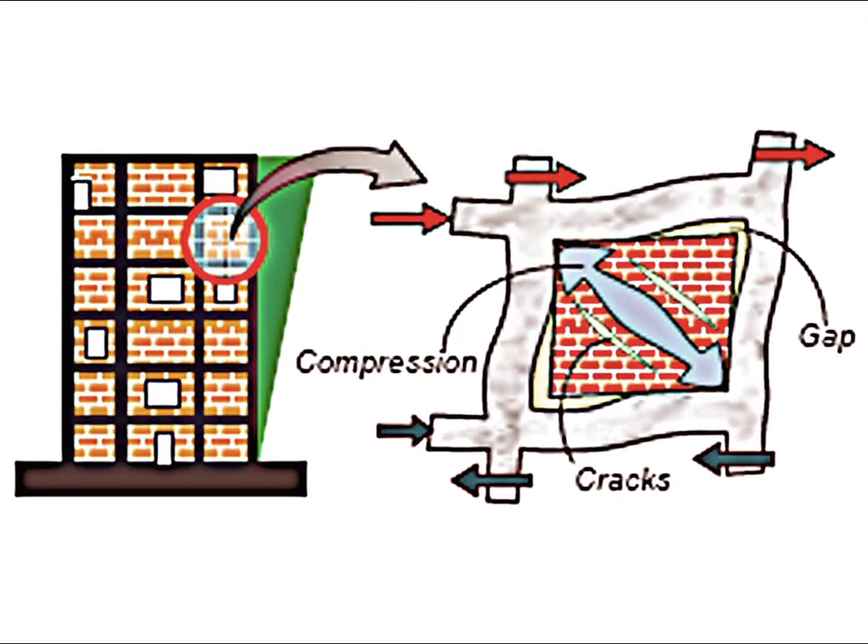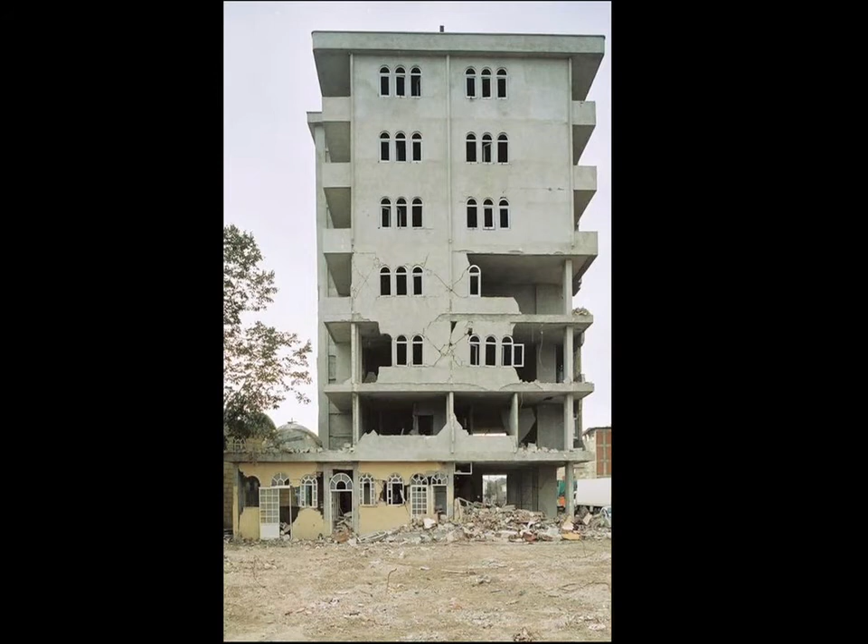There are many different ways that people have proposed to deal with it. Here's a picture taken in Mexico City after the 1985 earthquake. You see the masonry panel before it fell out completely shattered the column, almost bringing this building down. In this case, where it didn't even have a soft story to begin with, it ended up with one, luckily just prior to it collapsing.

Here in Van, just off the internet from a few weeks ago, is the same kind of thing. Soft stories are created by having masonry above and nothing below, or very little below.

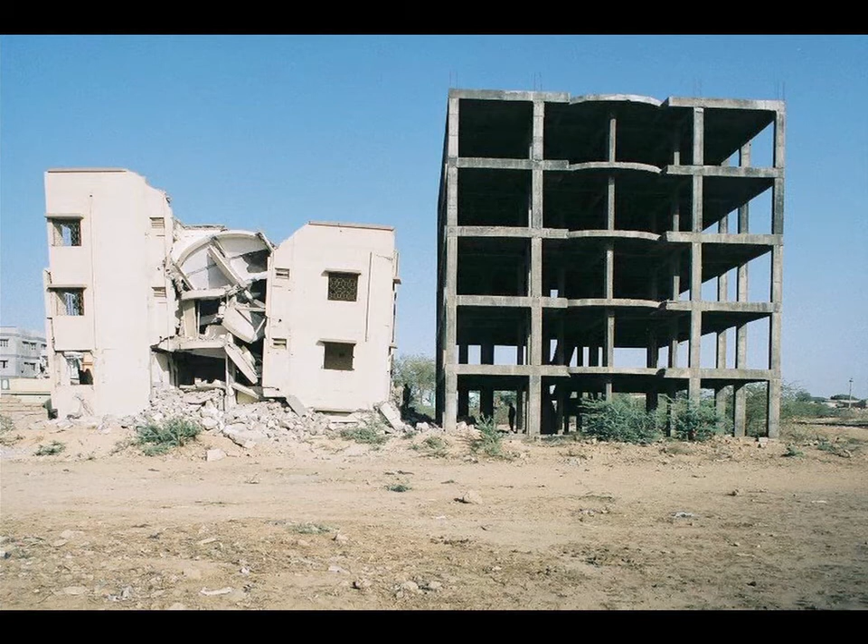Here it shows it all, because these are two more or less identical buildings, at similar heights originally. The one on the left was finished and occupied, and it collapsed. The one on the right hadn't had its masonry walls in yet, so the frame action under which the portal frame analysis is predicated could occur. The only thing that fell down in that building was the water tank structure in the back, because it had solid walls and therefore couldn't bend as well.

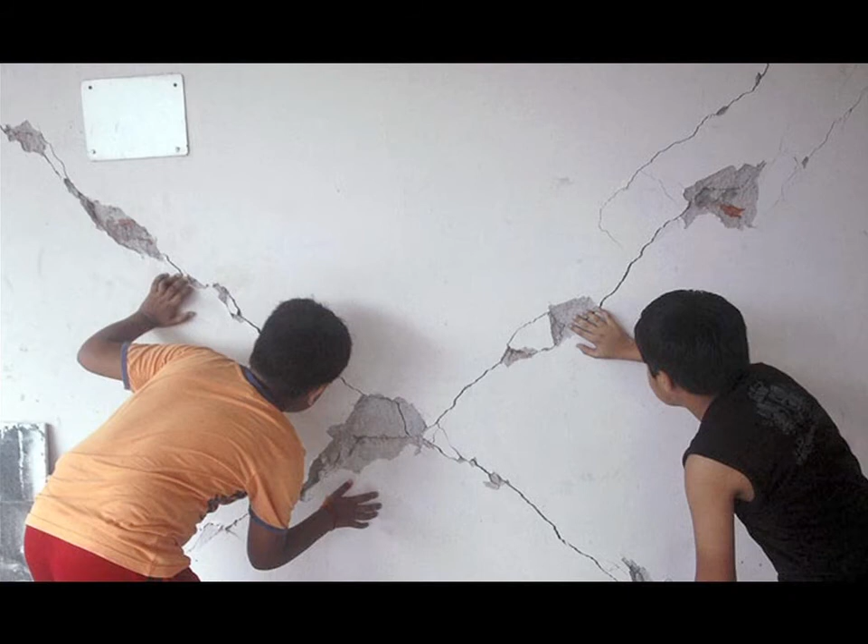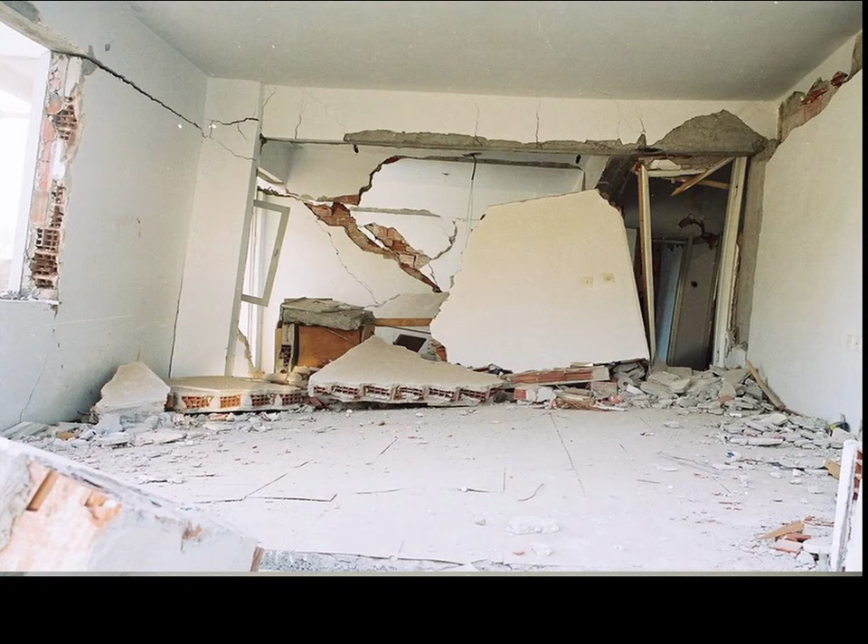This is a fine picture I found off the internet, just from the recent earthquake, that says everything about where we need to look to fix this problem. It's these infill walls, these non-engineered architectural finishes that are not part of the engineering design of the building. They're treated as dead weight, but they corrupt the frame action. How do you turn them into something that works?

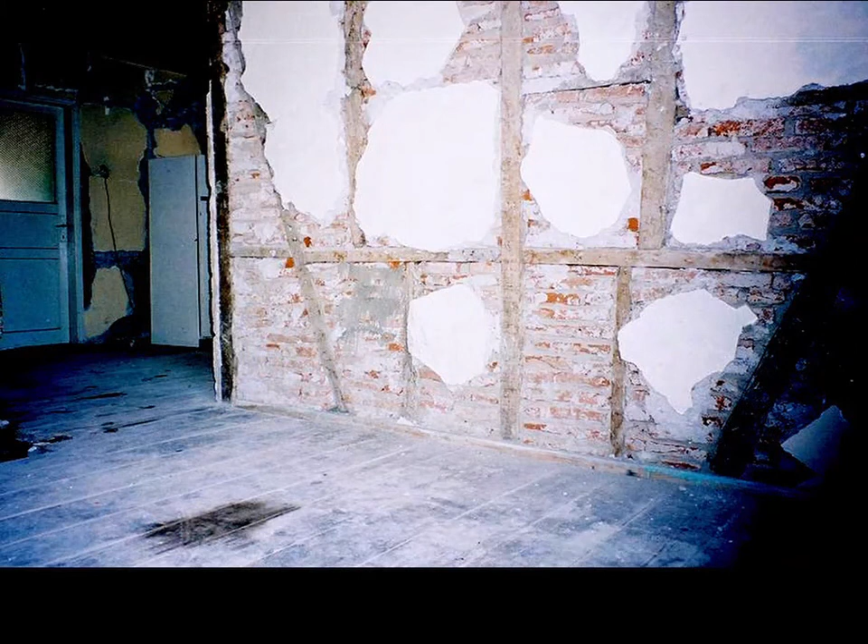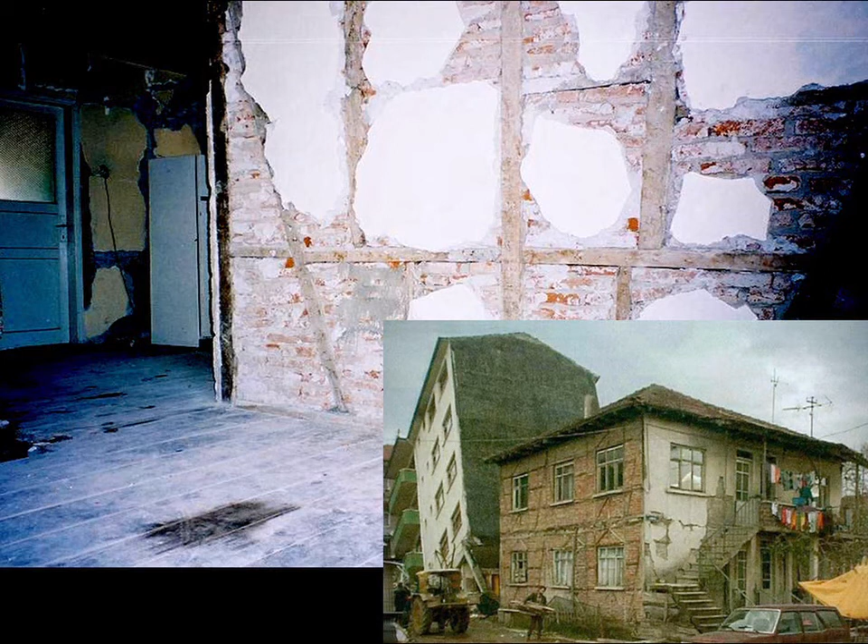My idea is that you can do that, and the way to do it is to look back at the dodgy construction you see here. This picture was taken through the window, the third window on the bottom floor of that building on the right, with the collapsed concrete buildings behind it in Adapazari, or in Duzce. What that picture shows is the working of the wall in place because of what I call the subframe, or the armature. I've called this armature cross walls, because that subframe holds the wall in place, but it's also predicated on using weak mortar and strong masonry, not concrete mortar, not strong masonry.

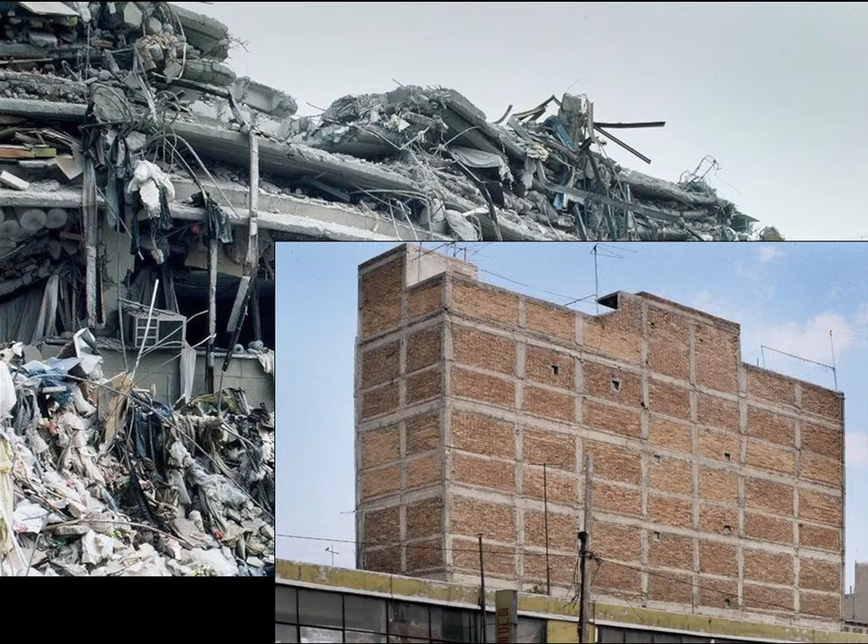This is how a building would look if you did that. This is what I found in Mexico City, and right next door to it was that. The floor levels are visible there. The smaller members are a subframe, in effect.

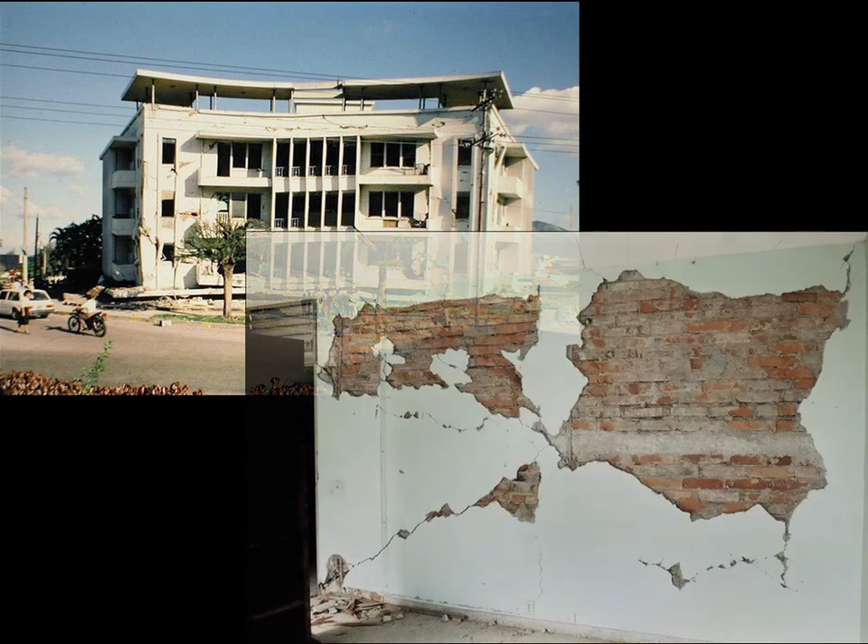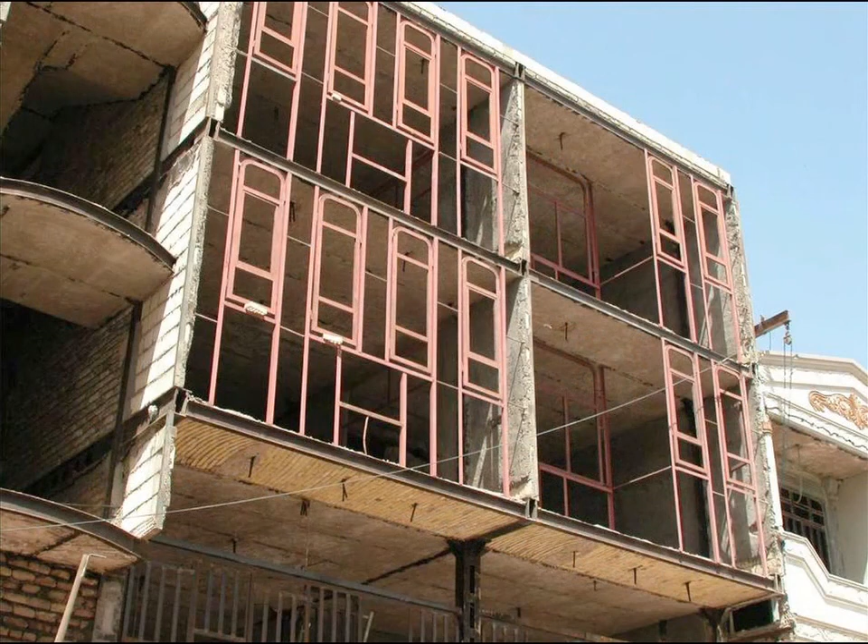Here in El Salvador, same effect. I wondered why the upper floors didn't pancake too - subframe. In Bam, Iran, a steel frame building: the back gone, the front still there. What the hell's going on? I saw that their system of construction is with the steel frame windows put in first. Another building finished off, but with no stucco over it yet, or finished brick. The back of the building gone, it had no windows.